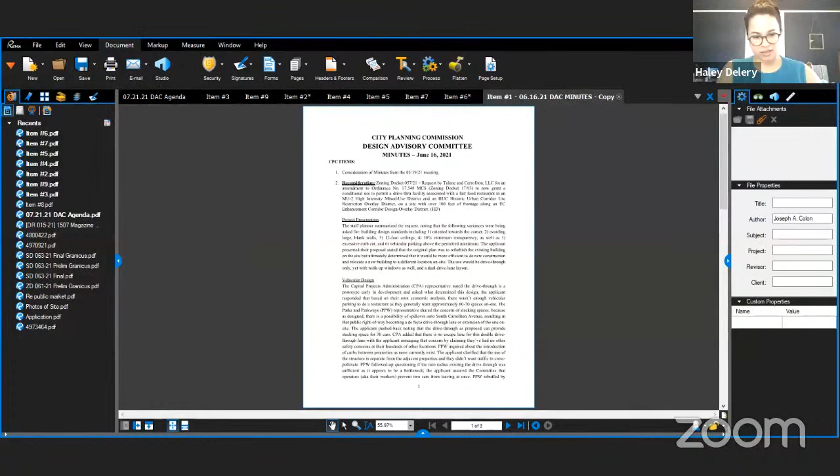We will begin with the consideration of dockets. Item number 2 is the reconsideration of design review docket 4321 for a property at 3200 St. Bernard Avenue. We have Seneca Toussaint signed up to speak on behalf of this application, and Joseph is the CPC staff member assigned to this case. As a reminder, following the staff presentation, the applicant will have 10 minutes to present.

Joseph? Hey, yeah, sorry about that. I'm seeing the applicant just emailed me and they're saying that they were not ready to appear today and they will also be on the August agenda, so we can go ahead and withdraw this one and review it next time as well. Okay, thank you, Joseph. So item number 2 is withdrawn.

The third item on today's agenda is the consideration of zoning docket 5221 for a property at 1152 Magazine Street. You may remember that this property previously received conditional use approval for multiple components, including an indoor live entertainment venue. This conditional use request is now before us because they are proposing to add a standalone wine shop, and the scope of DAC's review today would be to look at the proposed facade modifications. We have Megan Bell signed up to speak on behalf of this application. Megan, you now have 10 minutes to present.

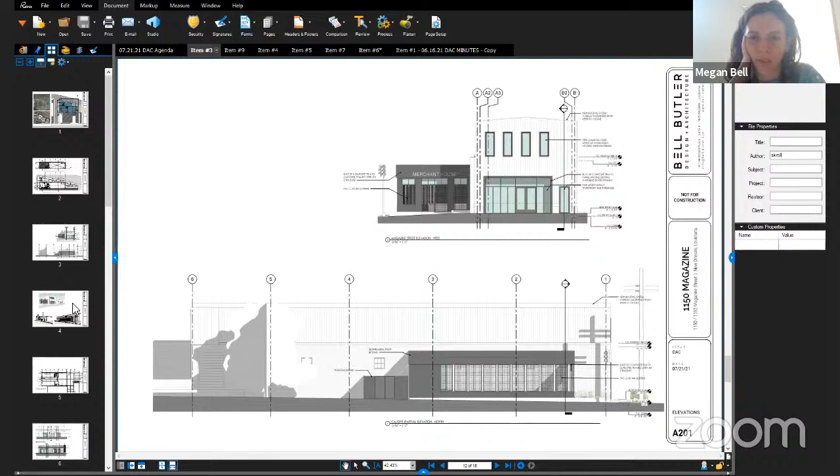Yeah, I think this is an outdated version. We actually changed the upper level windows to be aluminum. There we go, that's the one. Aluminum clad windows that are mulled together to give the opening a more warehouse-like feel. So that's the main change in these drawings.

So the existing overhead door at the ground level, we're proposing infilling with storefront, and then removing the 2 small upper level windows to be replaced with these mulled together aluminum clad windows.

With the addition, what we intend to do is an open air addition that still provides for security. So if Merchant House were to store patio furniture or plants out within this structure, they would still have a way to lock it down at night and provide security.

So the development of that was just to do these 4x4 fence panels, which are wire fence panels that are PVC coated. That's the kind of grid pattern you see in the elevation. We tried to detail it in a more traditional way where the front has a parapet condition that could be trimmed out with a composite trim element, and then you'd have the infill of these PVC clad wire mesh fence panels that would create a double gate at the front that could be opened when the business is open, and then another gate on the right side that provides access to the ADA ramp.

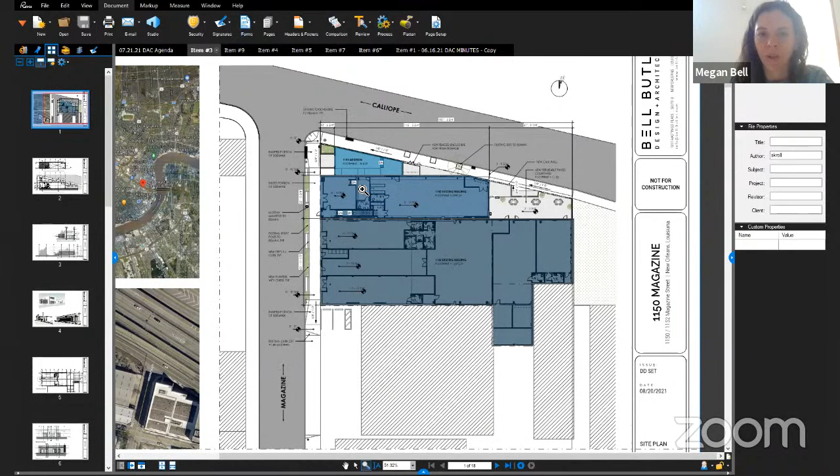I think we just wanted to create an offset and a kind of outdoor entry area. Where that facade actually falls out, I think is pretty flexible. The ramp itself does present a challenge, and I'm actually not sure how. I think I'll have to answer some questions with the state fire marshal, for instance.

Because what we're having to do is create, so there's a primary set of double door gates that are centered in that elevation. And then on the right side where the ramp is located, we would have another gate that would technically just stay open during operating hours. It's not really meant to be an operating gate for any of the patrons of the space. But so what's happening currently is that the line of that facade is falling out after that first 12 feet of ramp, which brings you up approximately 1 foot.

The grade resolutions here are a little bit complicated because what's happening with the sidewalk is that we're utilizing the sidewalk to provide ADA access to both buildings. We've done a BBSA appeal already for the base flood elevation of 1152, and they're allowing us to be 11 inches above the top of curb.

And so what will have to happen with the sidewalk is that beginning on this neighboring property, it will start sloping up such that there's a 0 grade change at these doors to 1152. We'll maintain that grade across the front of 1150 all the way to this ramp entry. And then beginning at that point, we have to work our way back down to the corner condition of the sidewalk. So it's a little tricky finding the right resolution to those grade changes at all of the various entrances, and I do think having some setback cleans that up a bit.

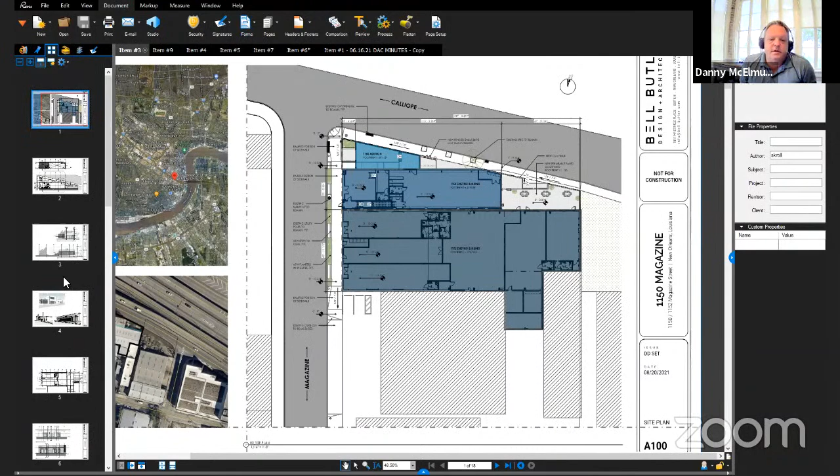It's a good point, Eleanor. I kind of want to hear about the other building too, but since we're talking about these ramps, I have a real huge concern about them, and I know we've talked about it in other buildings. Now the city's on the hook for steps and ramps and pedestrian safety in this location. This is a perfect spot right there, that lower left corner. You're creating a ramp situation in front of somebody else's property, and it's not your property. So that concerns me greatly, that there's an imposition on an adjacent property owner to accommodate your ramp, and you haven't contained your ADA access to your property.

That's a big concern for us, or at least for me, because you haven't provided the street trees that are required. You're creating this situation that we're seeing repeated. It's not just you, none of this is personal, Megan, I know you know that. But we're seeing the same situation recreated elsewhere, especially on this location where this is a one-way street. Car doors are going to have to open out into this little planting area or onto the steps. It's very concerning to me how this is designed to just put the ADA access in the public right of way instead of in your building where it belongs.

Based on some recent experience, we have a project on Britannia Street that utilizes the sidewalk for ADA access, and actually the grade transitions all the way up to like 30 inches above the top of curb, which I find excessive. I think this is a little bit more manageable, as we're only going up a maximum of 11 inches above the top of curb elevations reflected on the elevation certificates. But on that Britannia project, we had a similar condition where the sidewalk modifications intruded onto a neighboring property, and we were told by DPW that we just had to notify that adjacent property owner. So that's been my only experience of this condition.

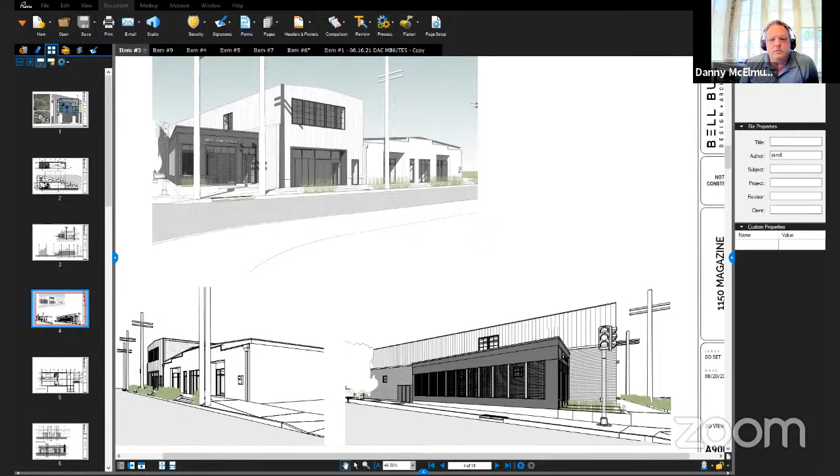Yeah, and I do think we will do tricks like that. There are some code criteria, like you're supposed to have a level landing on the inside and outside of your door, so they don't love if you just ramp right up to the door entry. But I do think when we get into more detail here, we could resolve for at least some of the grade change in those vestibules, and then potentially even start sloping back down in between the entry to 1152 and 1150, just to try to get ourselves lower before we start working our way back to the curb.

Hey, morning, Megan. So I wanted to ask you some questions before I even attempted to comment and make some prescriptions in line with what my other committee members are saying. I don't know if you could see my annotations, but this is kind of the dividing line, right? Like this is one project and then this is the other. Correct. Okay.

So I'm very fascinated by Eleanor's point, because I actually didn't mind the kind of open space relief at this corner, but then just reviewing this condition of these two buildings as one, right? And they can be accessed interiorly as well, correct?

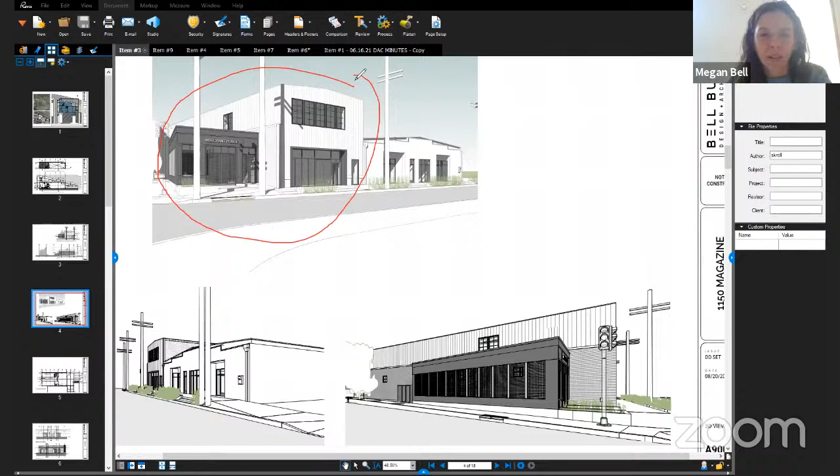So what's happening in the floor plan, you can't access what we're calling tenant one, which is that ground floor storefront in the old overhead door. They actually do want to have a convenience store between the two tenants internally, but the whole intention of the addition, aside from giving them some covered outdoor space for their plant and patio furniture programming, is— I think the owner's concern was that they're giving up their prime storefront and street presence by creating that tenant in the front. It makes a lot of sense financially to do that, to get more leasable square footage into the building. So the addition was an opportunity to still give Merchant House a strong presence on the street and have the feel of a historic storefront, even though in reality, the building is kind of an open air covered outdoor space.

Gotcha. And so what's just kind of the scope of work for this existing structure? I know we have photos of it later, which I can go to now, right?

So these are the existing conditions.

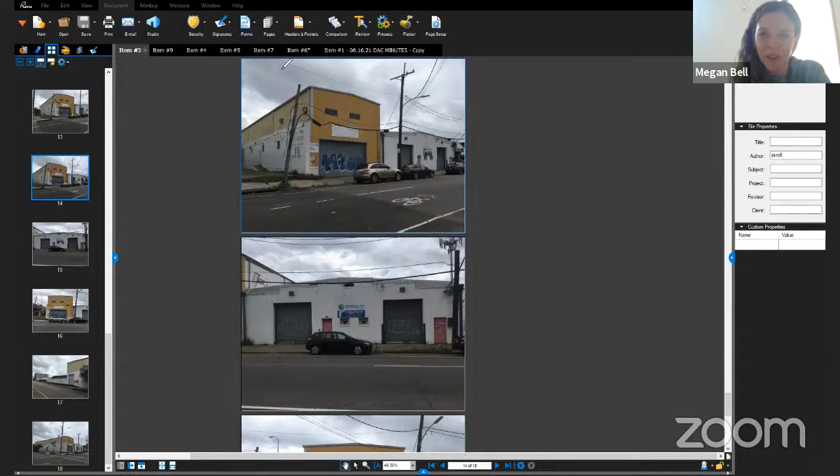So how much work do you plan to do on the exterior is what I'm trying to ask. That's been a little bit of a moving target, and we're bounded by budget. So what we're attempting to do is things that don't have a lot of visual impact, which is condition the building, put a new roof on it, insulate it, all the things that make it a viable commercial property.

As far as the facade is concerned, we're trying to keep the modifications minimal but still have a strong impact. On the Calliope side we do propose one set of aluminum clad windows with a divided light configuration, but otherwise on the Calliope side and the front of the building we would maintain the existing metal panel cladding.

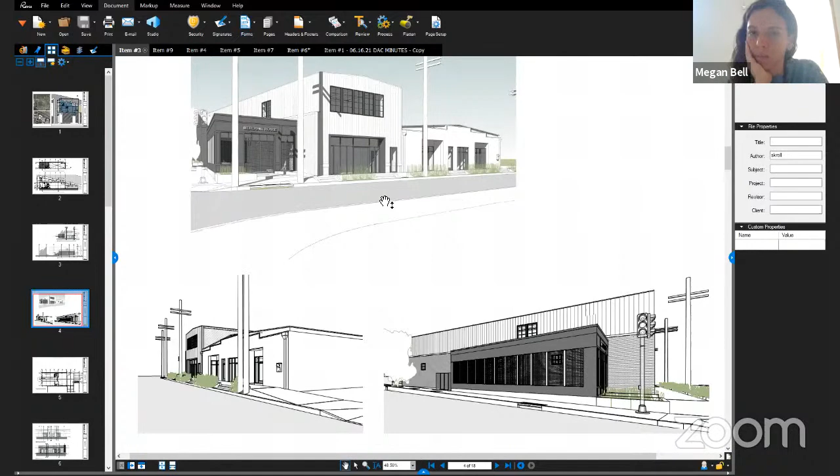My only concern from an overall design perspective, I'll temper it because it sounds like they're somewhat different tenants, but in line with Eleanor's comments, it's pushed far to the back, it feels like, especially in this rendering. Sorry, I'm looking for the tool, I can't find it right now. This condition just feels so tacked on, like it could be easily removed from both the property and its adjoining building.

I wonder, you're introducing a lot of architectural elements with the Merchant House. One, can we start to see those elements reflected on the existing metal panel warehouse? Two, if it's all exterior, then why does it look so enclosed?

Maybe you don't necessarily have to move up the front facade, but you could include some column and trellising elements to create a somewhat covered entryway into that merchant house building that ties into the front facade. So that would mean carrying over some horizontal elements or something.

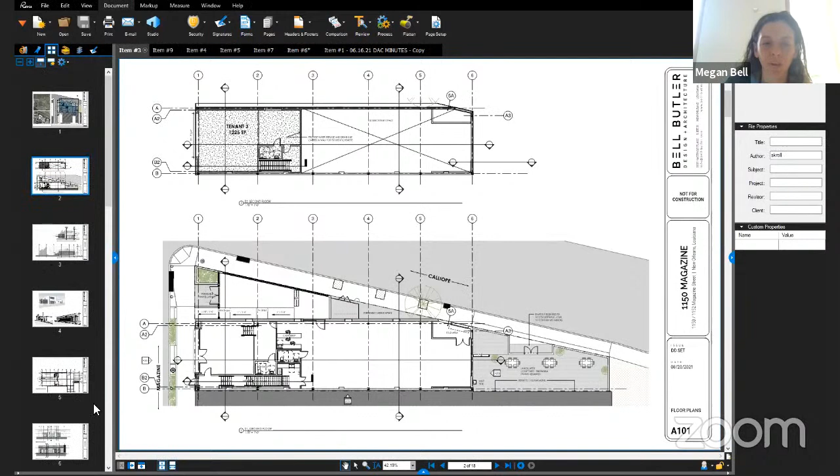Can I just point out, with regard to the ramp, because we are up that plus 11 at the base of the ramp you're seeing, we only then have to account for 36 inches of change. We're dealing with a pretty excessive grade change for that existing property, about 48 inches above the current top of curb. So while we are accommodating for some of the grade change, the sidewalk is helping us get there without having an excessively long ramp.

Okay, so Eleanor, go ahead. Sorry, Megan. All right, I just wanted to add that these are two separate approval processes. The one we're about to look at now, 1152 Magazine Street, is subject to a conditional use approval, so it's on a different timeline. We had a lot of discussion about the addition at 1150 — it would probably be okay to defer that to allow design changes, but for 1152, we're looking at the conditional use for the standalone wine shop. So hopefully we can look at that as two separate approvals.

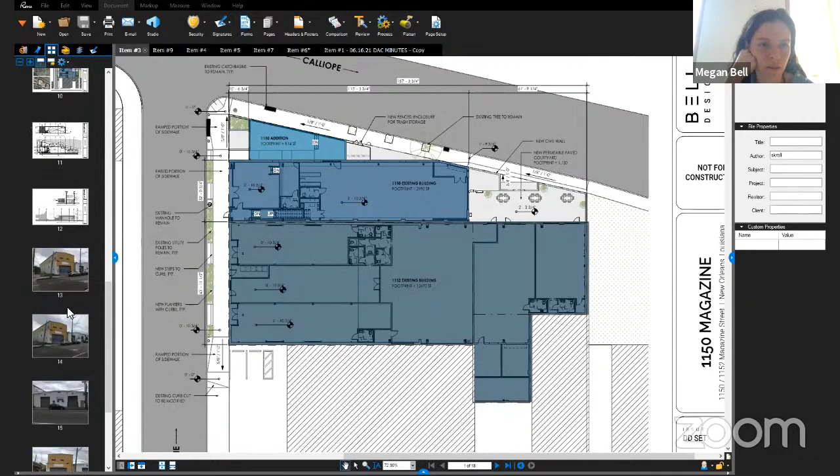So the facade modifications, if we want to go to a view of the elevation. Similarly to 1150, what we're proposing is that the two existing overhead doors get removed and we establish a vestibule entry with a new storefront double door entry in each opening. At the center of the building, we would remove the door currently shown as glass. Its elevation is a bit lower, so we'd bring the door heights up to get a consistent line across the elevation. Where there are two small punched openings now, we're proposing a new storefront opening.

This project is going for tax credits, so we've had preliminary discussions with Allison Saunders about this approach and already tweaked things based on their feedback. We were originally proposing eliminating the door altogether, and we're now going to maintain it. They want us to keep this small door at the end of the building — it doesn't need to be utilized, but as a remnant of that historic warehouse utilitarian use of the facility. This is somewhat subject to change based on when we receive formal Part 2 comments.

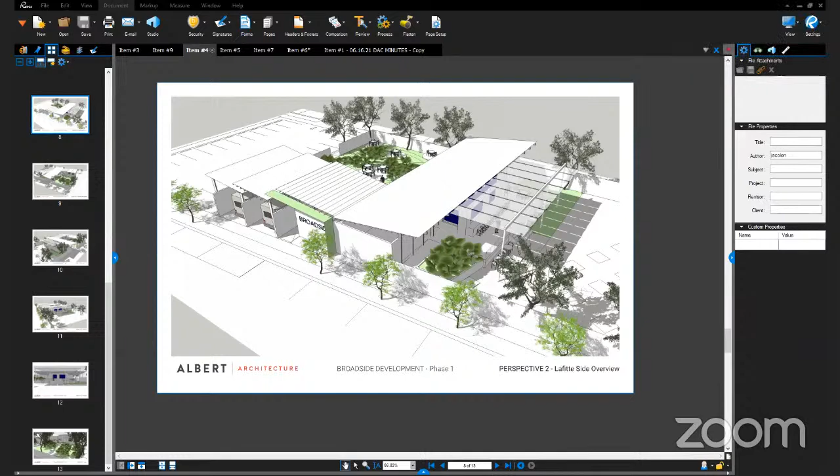So the seating area, you asked what's the ground - the ground is just limestone, a 610 limestone. And that area is approximately probably 3,000 square feet or so. I'm not 100% sure on that number. I can scale that out to find out the square footage. I just couldn't figure out the surface. Yeah, so that was all concrete.

That was in pretty rough shape, so we took all that out. This used to be a junkyard.

About where your entrance is, right behind the parking lot, that line approximately is where from there forward to Broad, we've been using it for the Broad Theater parking. I own the Broad Theater, and I also own this. Greenway Ventures was just something I purchased, but this is a Broad Theater sort of side project.

It managed to keep all of our employees busy during the pandemic, which was great. The response has been very positive. People want this to continue, we want this to continue, so that's why we're proposing these zoning changes, et cetera.

I'll probably let Jonathan take it from here unless there's a very specific business related question. Jonathan, you there? Yeah, thanks, Brian.

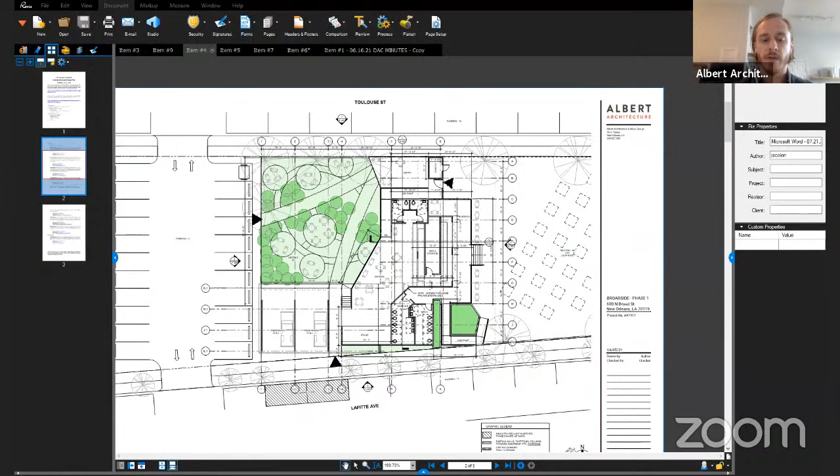Just to continue on the surface item that Robin posed a question to, the intent is to have essentially all pervious surfaces except for the roofs. This does put us above the 5,000 square foot threshold, so we will be providing stormwater management on site. I think we have ample space to do that, so it's not a concern, but our roof area has exceeded that number through the development of the project.

Robin kind of summarizes it pretty well. This is an extension to an already existing outdoor facility. What it's proposing to do is provide an open to the public side, which includes this seating garden and food truck accessibility, as well as a bar.

There's a defining line that separates one side, the public side, from the outdoor entertainment venue side. So there is a point where you would need to purchase a ticket to enter the larger stage area. You would then have access to that same bar from the other side of it, and restrooms are provided to each side as well.

This includes parking on the broad side of the development, and that parking also would be intended to be pervious. The intent from Brian's perspective, as I understand it, is to develop this whole lot eventually. However, this is phase one, which is essentially developing the center of the property.

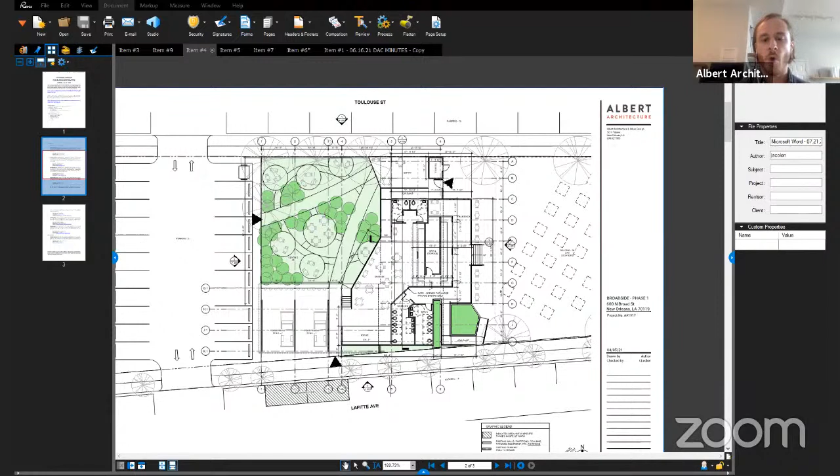The structure itself is fairly open air. There's a series of sawtooth roofs. The primary roof is oriented to help catch sound and direct it into the seating area for the outdoor stage, keeping it more or less contained there. The smaller roofs are responding to that from a design standpoint.

The idea is to allow air to flow through, keep cross breezes going, to keep the conditions comfortable.

Security will be provided by the perimeter fencing and gate system, so at night it will be locked down from the exterior. The structure is primarily wood with a steel post and beam primary structure and corrugated metal roofing on top.

The area is fairly industrial surrounding it, so we feel like this does fit in well. I think the broadside development, which would be an up and coming phase, will have a more finished and commercial look to it, but that's not really what we're reviewing here. I think that's a basic summary. Can open it up to discussion.

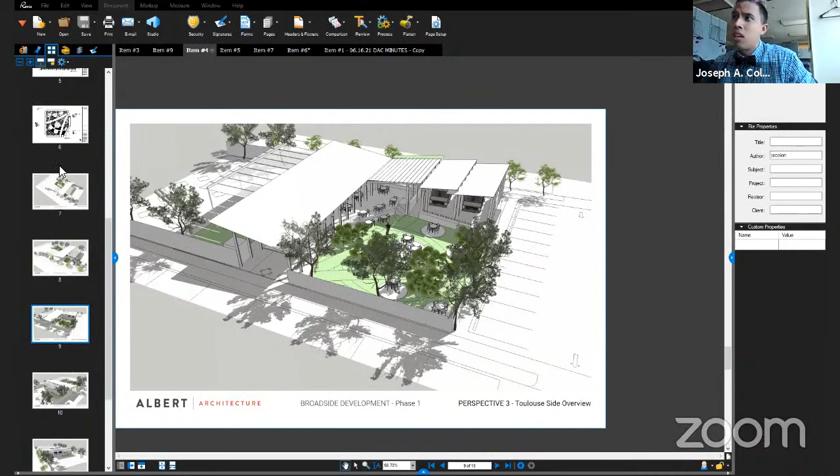Before I provide any comments, I'm just trying to understand what exists versus what's being proposed, because the documents say it's phase one, but I believe you all did say that there is something existing there now. So can you outline for me and the committee in general what on this site plan exists and what is being proposed?

Hey Joseph, excuse me for one second. Would an aerial photograph, a current aerial photograph, help? It's not in the submitted set, so we could just let the applicant outline what's on the plan. Yeah, I'll take it, Jonathan. So if you can enlarge it, maybe. So basically, where you see this, just move your cursor to the right, that's the existing stage.

All this sort of limestone seating area. Some of those trees actually exist now, and then we have this new facility.

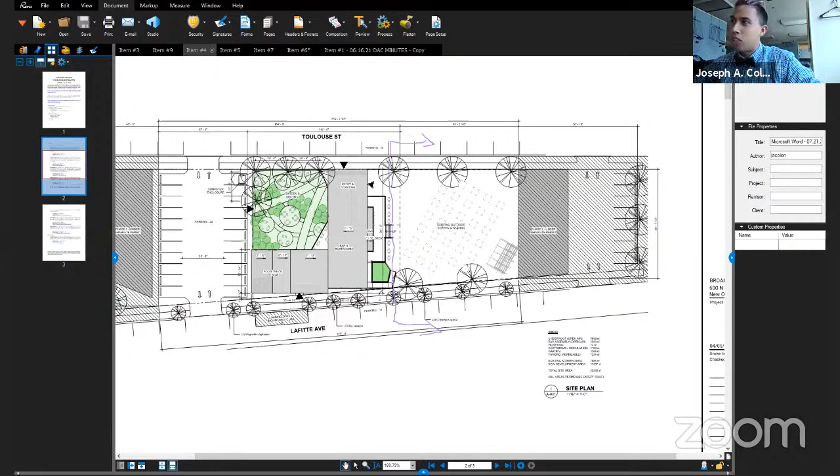Correct. So I'll preface my comments by saying we understand that systemic, city-initiated things require infrastructure to better enable property owners to develop their site in accordance with the goals and intents of various districts and overlay districts. That said, considering this site's in a Greenway Corridor Design Overlay District, and is right by, separated by, I believe a DPW city-owned site, and is in such a central, bikeable part of the city, I'm kind of confused and trying not to be offended at the site's complete disregard for pedestrian and mostly bicycle access. You have an off-street parking lot that is basically the first approach.

That anyone would make from the Broad Street side, which is how most people coming from the Greenway would access it. Then you have a lot of on-street parking, which of course you're allowed, but it's further defensive, in my opinion, of that bicycle access. I haven't spent much time with these plans, but I haven't seen any bicycle racks. So I don't think the site and proposal as designed is meeting the intents of the design overlay district that you're in.

That said, I will say that the green space, the built structure, and the concert area is all very well designed, and I feel it's very hospitable. But everything around that is not, and it's too oriented for vehicular habitation. So that's what I'll provide.

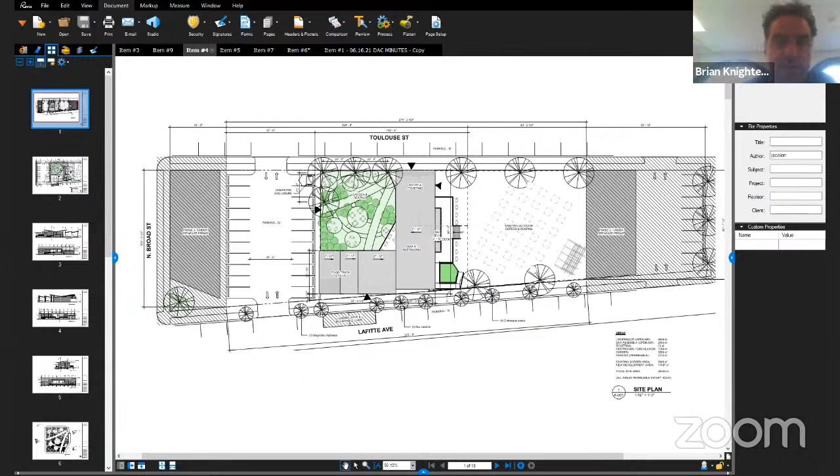I don't know if any other committee members have any other comments, but can I respond to that? Sure. Right where you have this entrance on the Lafitte Street side, there is bike parking planned for that location, and currently we have bike parking in the front of the current setup. There's bike parking in the front, but right where that entrance is, there is bike parking we're going to put in that location. Can you draw that with the annotation, please?

I'm sorry, can you say that again? Can you draw using annotation and show us where it's going to be? Because I don't see it. I don't think it's currently on there, but this is something we are adding on. Jonathan, can you do it right at this sort of Lafitte entrance? This area is covered, so that is the ideal location for bike parking. That is an entrance from the Lafitte Street side, so we would put bike parking right there.

As my fellow committee member said, we review what's in front of us, and it's not shown, so intentions don't really go much for us. I think having food truck stall space is great, but again, where is it located? It's located on the approach from Broad, which I'm glad we went to in this plan. It's a further vehicular-oriented place that, frankly, as a biker, I would have a hard time accessing. I think this needs a major redesign, but I defer to my other committee members because I'm just one voice on this committee.

Well, I think the basic concept is pretty solid, and I'm looking at the aerial photo that shows what's there now. There are several pieces of property, so I'm not sure how that's handled, but overall I think the concept is pretty solid. It's the details that are tripping you up, where the parking lot doesn't meet the zoning code, and we're not even seeing the sidewalk connections very well, at least not in this set. Maybe that shows up a little bit better.

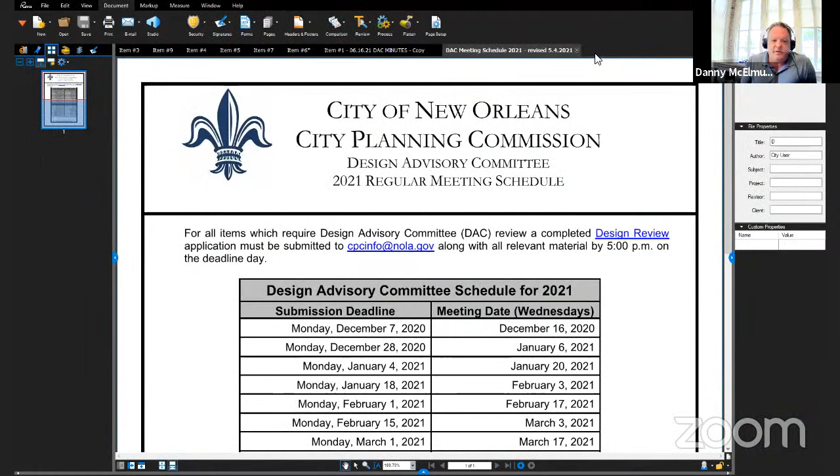One of the things too, we don't have a landscape plan, which is problematic at best. I think a landscape architect would have solved some of these problems for you. You've got to have street trees for Toulouse, as well as the ones on Lafitte. You're going to need them on Broad and the rest of Lafitte when you do the other two phases. I'm not sure what they'll be, but you'll still need to have the street trees installed there.

I just wanted to point out that we don't have a landscape plan to react to. The site plan does call out— I'm going to stop you right there. You know as well as I do that in Louisiana, that is not the law. The law is that you provide us with a landscape plan, not a site plan. A site plan cannot call out plants. I know I'm being picky about it, but you cannot do that. It's against the law, so just comply, please.

Sure, I would like to point out that within the Greenway corridor, the pedestrian and bicycle entry point should be oriented towards the Greenway. I see that the new outdoor green space is fronting more on Toulouse Street, and you have more of the food truck and vehicle stuff towards Lafitte Avenue. I'm just kind of wondering how the food trucks would access that location.

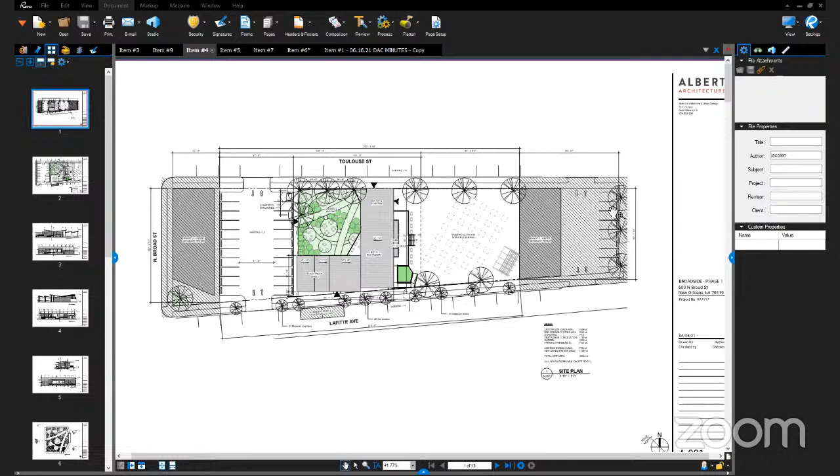Yeah, and there's a lot of that on Lafitte Street. I will of course never instruct the applicant to do something that's not required by law. I will say that personally, I do question the need for this much off-street parking, and at the end of the day, it really shouldn't be one of the predominant visual or site elements in this location, in this design overlay district.

Do you think any of this could be resolved with like a corral on Toulouse or Lafitte?

Okay, thank you for letting me know that, I appreciate it. Right. Hi, I can hear some background noise, if we can all mute our microphones.

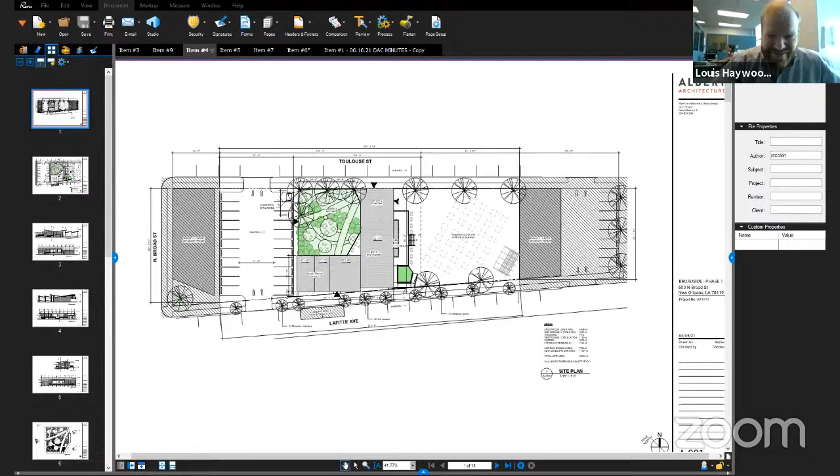Okay, I got it. Louis, what do you mean by a corral? Like a lot of bike parking in the parking lane, or even building a curb extension and putting it on top of that. I don't know if that satisfies anything in planning terms, but it's a way to replace parking spots with bike parking, though bikes would still be going through the parking lot. Maybe putting a bike corral using 2 or 3 spaces right at an entrance, close to the street entrance, could be an improvement.

Yeah, certainly, we would definitely be open to that for sure. Just letting you know that could be an option.

Louis, does having the access... I really like the idea of having these pull-in stalls for the food trucks, I think that's really great. I want you to know that. My question though is, does that count as a driveway, or how does that work?

Probably counts as like an off-street loading zone. There's currently a mountable curb at that street, so the idea was just to leave it as existing, reserve those spots, and the trucks could pull over the sidewalk into there.

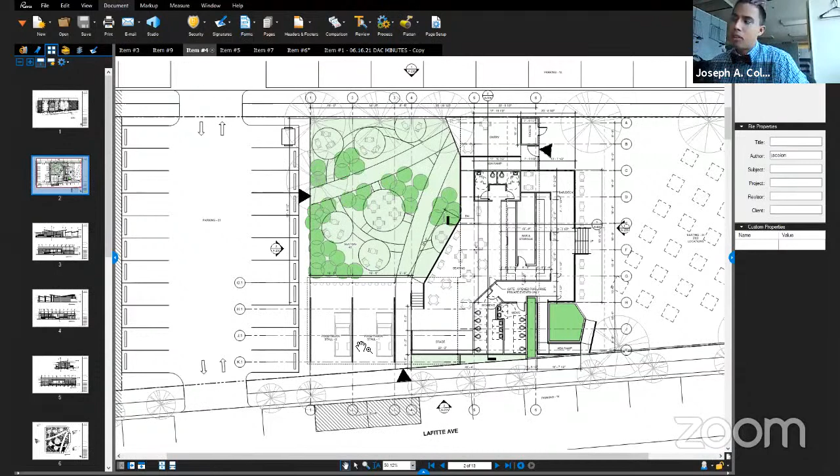This is for Robin or Louis. I'm a fan of this food truck pull-off, but I don't know if this is the correct orientation, because would this classify as an excessive curb cut width, or amount thereof? It also appears they're having a curb cut and a loading zone, and that feels like a kind of traffic conflict.

Yeah, I mean, it's probably not really a loading zone, probably. We have some other places with signed loading zones at off-street loading areas, so it certainly wouldn't be the first thing like that, and maybe we do that here too. But I wouldn't get hung up on it, it could be done either way. If it's an obvious driveway, we probably wouldn't sign it, but we do it in some larger driveways in the back of office buildings and stuff. We've done it before.

And there probably would need to be some kind of permeable material put in that parkway as they're going across it, just so the wheels don't get stuck in the grass.

Yeah, in terms of it being excessive width, you may have a point. That's also controlled by zoning, at least halfway, since it appears in the zoning code. So we usually want to see a variance too for that, if y'all think it's a driveway.

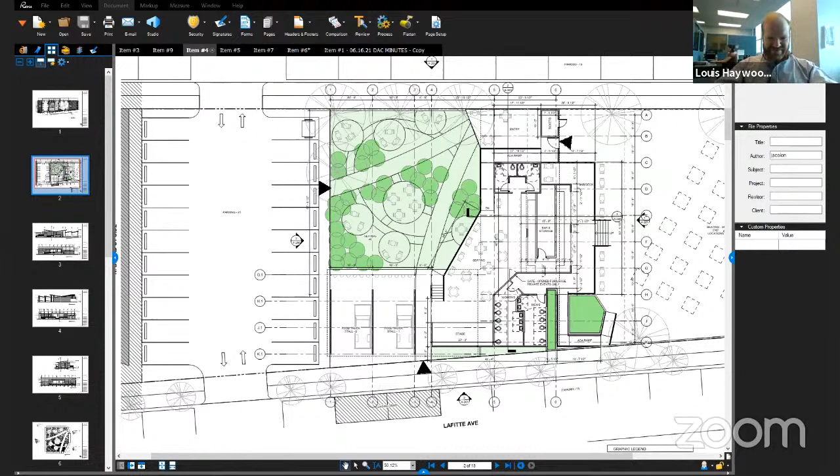May I say something about the orientation of the food trucks and why they're there? Just to the right of this entrance is the main signage for the business. That looks like the visual entrance from the Greenway. I'm not sure what page it's on, but that's why they're there. If we were to move it to the other side, it would lose that wall where we'd have that entrance.

If you go back, yeah, right, that's the one that says broadside. Correct. And we had discussed, post you guys receiving these plans, putting bike parking right along this wall. This is set back off the sidewalk, I don't know how many feet, but it's an ideal location for additional bike parking. We could easily secure it with cameras.

It is an entrance, so the orientation of the business faces the Greenway. Although you're right next to the gas station, so you can't see a whole lot from the Greenway, and the growth of the Greenway too really obscures the view of this facility, but mainly the gas station.

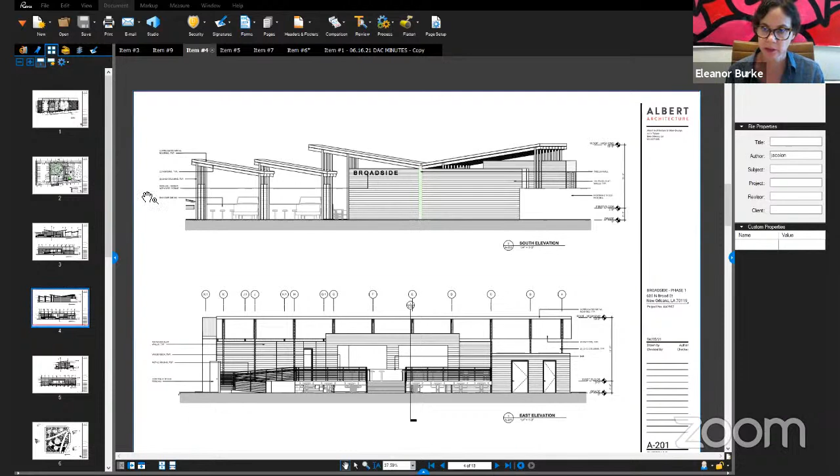What phase 2 was going to include. Phase 2, which would be the front here of the property, that is going to be probably a 2-story, retail on the bottom. I don't know, maybe apartments up top, maybe a 3-story structure. Something that has more of a daytime use, like a doctor's office. I do have a dentist who's interested in the space. It's only about 5 bays, once you take this soft corner, really only about 4 to 5 bays. So something like that, just retail on the bottom.

Okay, otherwise I don't have any concerns with the proposed design. I think it looks really interesting. Thank you.

I would like to point out that a loading space must be at least 35 feet in length, and these seem a little bit shy of that. Also, they're not allowed to be located in the front yard, so these are slightly projecting in front of the building line, which would be technically within the front yard. So I think we need to look at whether these are considered loading spaces where the food trucks would be, because they don't meet the size requirement. Although your site constraints are determined by you, you can pull that front line up into the outdoor area.

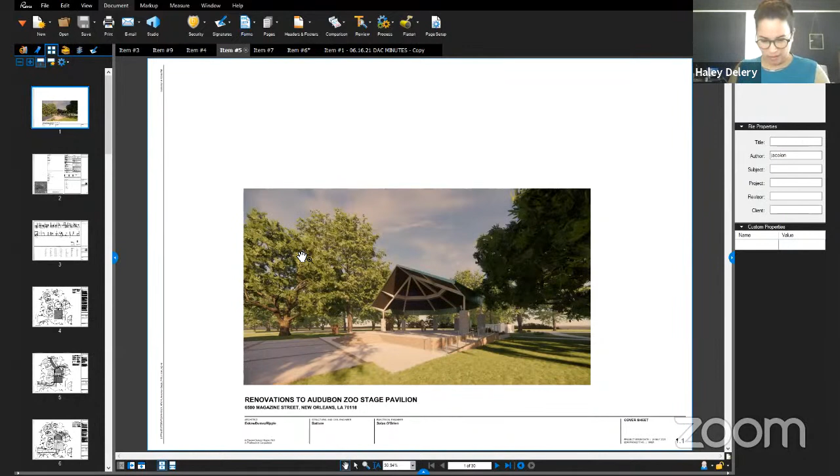Okay. Is there any other conversation from any other committee members? Thank you. If not, we will be moving on to item number 5, design review docket 7521 for a project at the Audubon Zoo. This is a renovation of an outdoor amphitheater. It requires DAC review because it is a public project. We have Mike Johnson signed up to speak on behalf of this application. Mike, you now have 10 minutes to present.

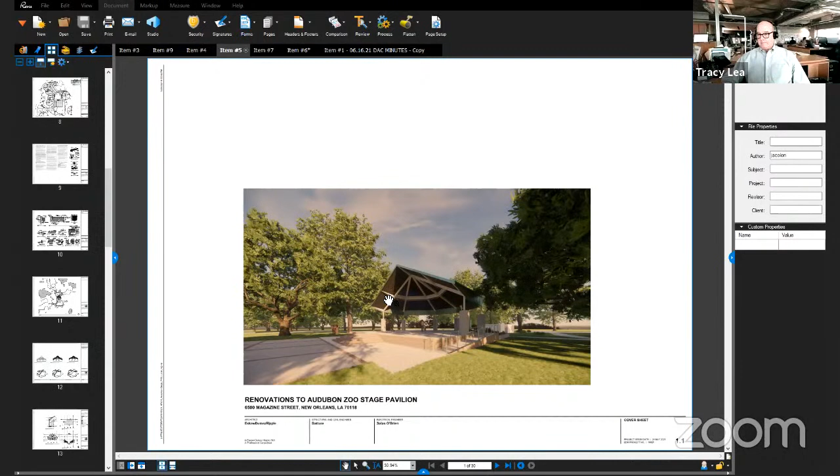Hi, good morning everyone. I'm pinch hitting for Mike today, he's on personal time off. Tracy Lea with Eskew Dumez Ripple Architects, representing the Audubon Commission, our client. This is the stage pavilion that's within the confines of the zoo, within the zoo grounds. And if you've been to the zoo in the last 35 years, you've seen it. In your packet, if you turn to sheet 1.51, you'll see some existing photos of it. Sorry, what page number is that? 1.51, and I think you'll recognize it right away.

The Audubon folks have secured some funding in return for naming rights, and they're matching it with some of their own funding to upgrade and update this thing.

And there's some functional things that we're doing with it. But they also asked us to take a look at freshening it up and updating the design to bring it into the 21st century. It was built in the mid-80s, and it has this kind of postmodern pediment that's the defining feature.

It has a copper roof, which is in good condition, and the stage itself is cast in place concrete, which is in okay condition. We're proposing to resurface it. The rest, it's a steel and concrete structure, and all that's in great shape. But the pediment and this apron element are wood, and they're rotted out badly.

So the proposal, the intervention, is to try to lighten it up a little bit. It's architecturally sort of heavy and a little bit oppressive. So the idea is to scrape away some of that wood, which needs to be replaced anyway, and raise the structure a little bit and just lighten up the whole thing.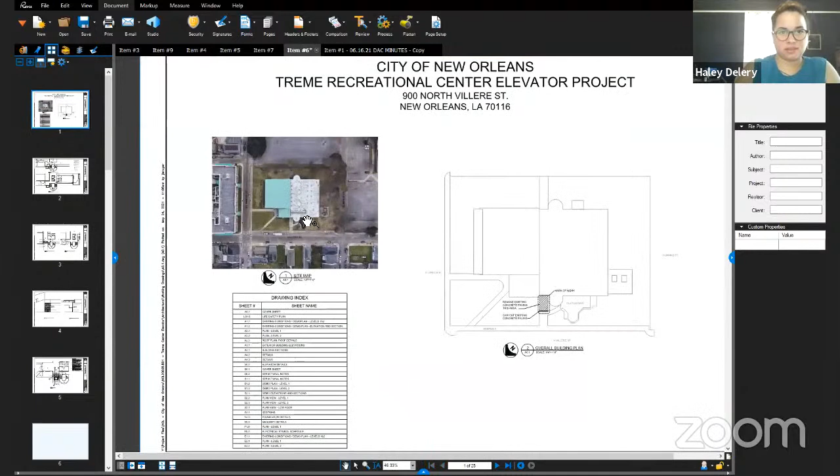This is design review docket 7621 for a project at the Treme Center at 900 North Villere Street. The proposal is to add an elevator to the front of the existing building facade. The reason this requires DAC review is because it's a public project, and we have Greg DeCourcy signed up to speak on behalf of this application.

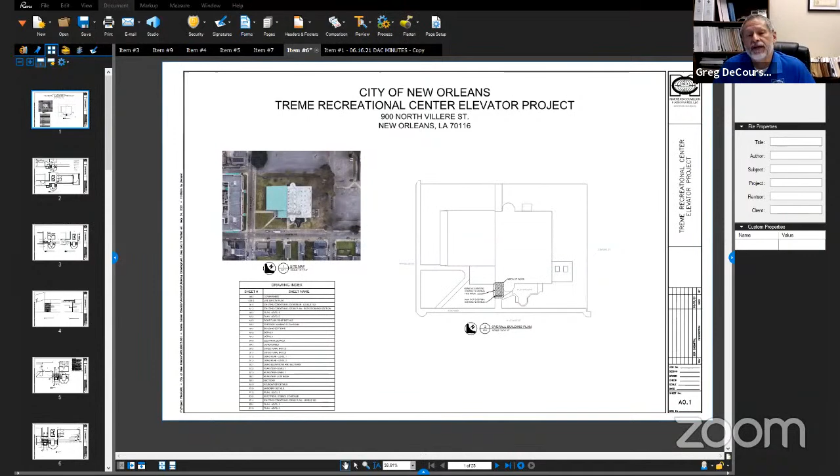Greg, you now have 10 minutes. Sure, thank you. The elevator is being installed by Capital Projects for ADA access to the second floor.

I think I probably should tell you why it's located where it's located. The building footprint is pretty large, but the bulk of that footprint is the gymnasium and the swimming pool, which are 2-story spaces. The second floor is actually more of a mezzanine. It has a dance area, a crafts area, an office, some mechanical space, and a fitness area.

Most of that second floor is along the North Villere side of the building. There is an area that goes toward the back of the building. It's not too wide. We looked at areas both inside and outside as a place to locate the elevator. Inside was pretty problematic just because of the way it's set up.

There was a space on the second floor that looked promising, but the locker rooms for the swimming pool were right underneath it. With situations like that, where we couldn't line up the first and second floor too well to make things work, in addition to the fact that doing construction like that inside the building would have been pretty disruptive to the function of the building.

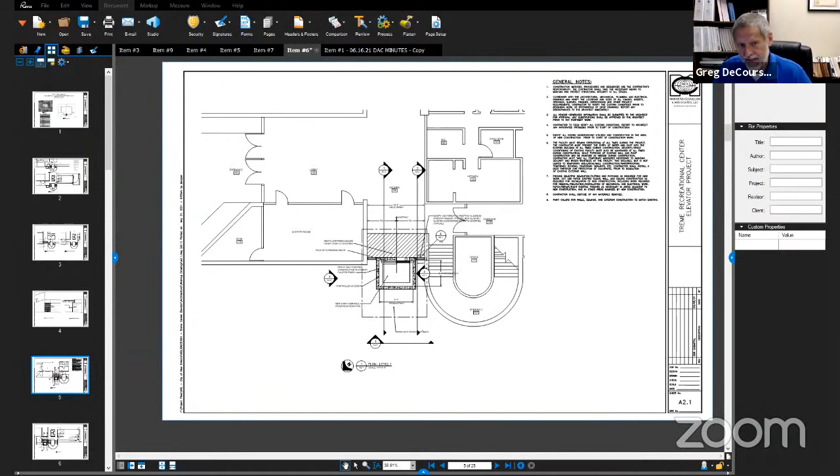But code-wise, I should mention, as far as exit width, this building has plenty of exits, and even removing this exit from service, we still exceed the required exit width by code.

There was one other code issue that came up. The craft area, on the far right hand side of the second floor, used to have a door connecting it to the dance area, which was removed in the last renovation. We're having to put that back to keep exiting within the maximum allowable distance. So coming from that area and down the stair, rather than making a U-turn and going out that door, they'll have to go to the main entrance.

We would have liked to have the elevator off to one side and kept the door there, but there are pile caps on either side of that opening that would interfere with the elevator pit if we had done that. So we're centered in that opening. We're putting windows on either side, but there's not enough room to keep a door there.

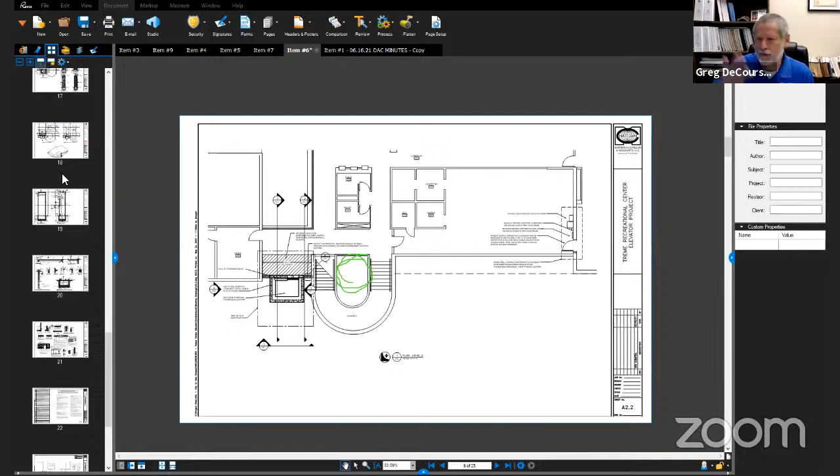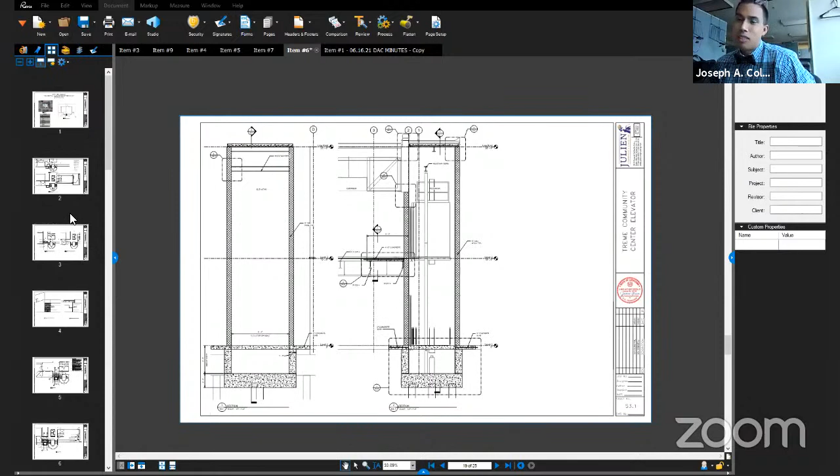Joseph, only sheet S2.2 shows a little bit of an axonometric view. I appreciate the sheet numbers—can someone send me an actual page number? Like, is it page two? It's like page 18. Oh, thank you so much.

You're going to have to do a lot of accommodation on the building facade, since the second floor does overhang and the door is actually recessed, so you're going to have to do some structural accommodation anyway. Yes. So if you're going to do that accommodation and you had to have it on the exterior...

I don't know why it can't be on the right-hand side of the stairwell, in that play area, with a new sidewalk leading up to it if necessary, or however you need to get to the access route. But since it's external, there's no reason it can't be in the playground area, if you're going to have to do physical modifications to the facade anyway, without having to close off that door. I just don't get that.

Yeah, we're just trying to stay out of the meeting room. But isn't there a hallway right there, by the meeting room? Am I not looking at the hallway plan correctly? The hallway is outside of the stair, but once you get past the stair, you're in the meeting room.

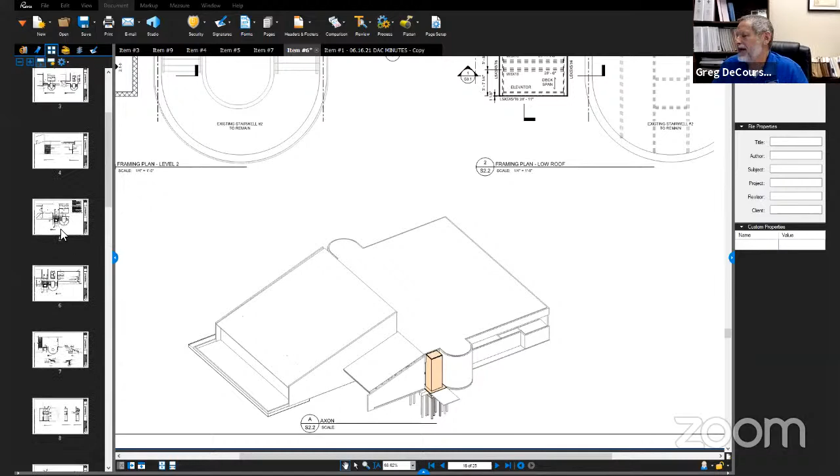Danny, is there a second floor plan we can see in this set? Yeah, if you go to sheet 2, you can see on the second floor there are small rooms as you go into what I think is still the dance studio, but there are smaller spaces in there. That door into the dance area would need to be moved over to accommodate it. And I know in the meeting room, that does create where they're going into the meeting room, but closing off a main entry to me is really problematic.

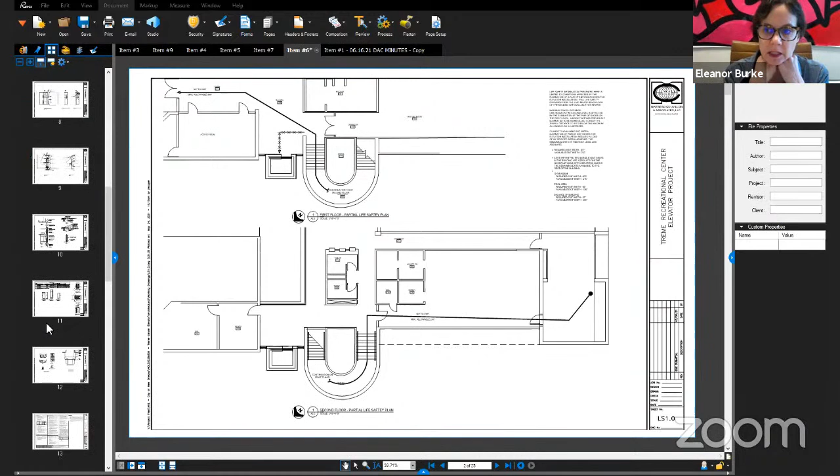Is there an elevation drawing showing how it impacts the front of the building? Just that one little axonometric on sheet 18. Yeah, I feel like we need a drawing showing, what are the materials? I don't know. As I said, I had sent an additional sheet with the photograph and the corresponding elevation, but I guess that didn't make it into the package. Greg, what email address did you send that to? Because I know I requested the information, but I did not see that it had been provided.

Sure, if you give me a second. For this, can we take an exception where it can be forwarded to you?

I don't know which way we're going to vote on it, but in my opinion we're going to have some pretty strong requests for revisions, and I think it's likely, whether it's approved or deferred, that can just be included in the next set. I don't want to speak for anyone else, that's just my opinion.

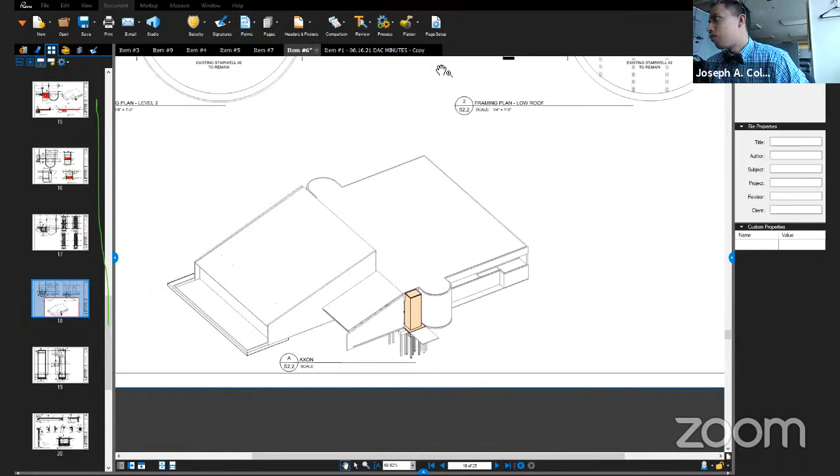Is there any more discussion from the committee members before we move on to the next item? We'll come back after the recess and we can provide any further input.

I do have a question, and I know I'm being a little... I'm trying to clear this. How do I clear this out? Oh, there.

Was there any thought, or did y'all do any studies, Greg, on pulling that elevator a little bit further out and creating more of an entry vestibule with a small bridge going over to the building, so that you don't lose the building itself as being that entry?

We did initially look at that, but basically we were restricted by the budget. As it is, we had to pause this project for a good while so capital projects could go find additional funding to make it work like this.

Well, this building, maybe I'm a little too involved with it, but it has such a very strong architectural form from that time period. Built in the early 70s, '74, '75, '76, it has a very distinct facade. And this is basically just completely ignoring that, saying we're just going to close this off and create this one little block that doesn't necessarily tie the building together. It does not fit the architecture of the building. It's just a big concern for me.

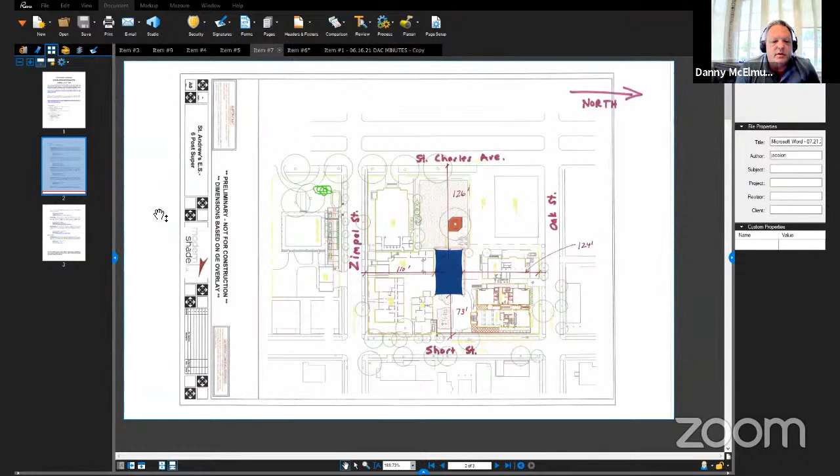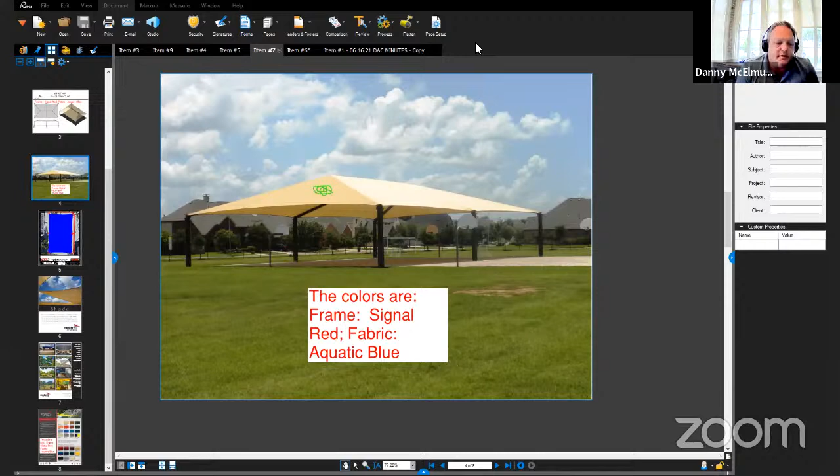Yeah, Catherine, my only question is are you sold on that blue, or would you be willing to go with a lighter color? Because I think you'll get better reflectivity and a cooler site if you go with something more along the cream or white color pattern selections. If you go to number 8 down there, Joseph, there's some lighter colors.

The blue, we found the blue to be two things - blue gets really hot underneath there. We're having problems in Palmer Park because sometimes it gets kind of hot underneath that one. And I think Palmer Park is still blue, if I remember right. And it looks like a FEMA tarp from a distance, so the blue color ends up looking like a big FEMA tarp.

And what color do you recommend, sir? I was just thinking some of the lighter colors, like they have a natural or a desert sand, and even that steel gray or the gun metal - the blue just absorbs, it ends up getting pretty hot underneath there. And the reds also get pretty warm.

Even the red post—whatever color padding you use, I would still offset the maintenance with a lighter color. The lighter color is still going to remain cooler over time, even for the posts, because they're going to be in the sun and get really hot, and you don't want your kids to lean against them and get burnt.

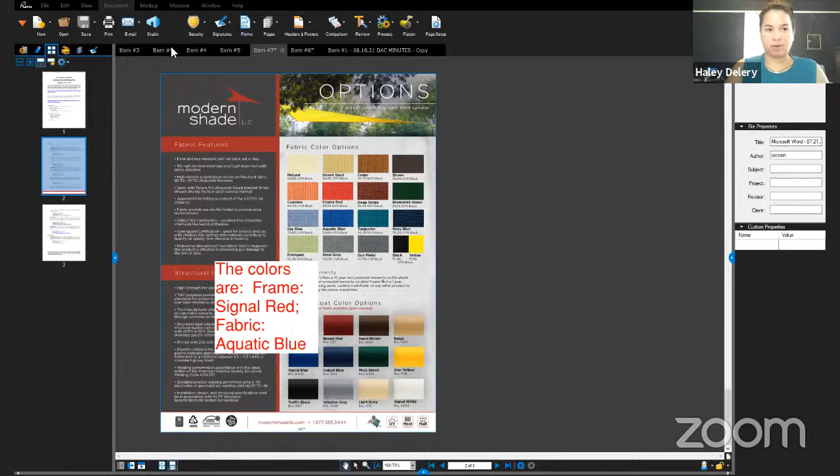If there's no other discussion from the committee members, we will now move on to the last item, because item number 8 has been withdrawn. Item number 9 is a non-CPC item submitted by the Department of Parks and Parkways. This is the A.P. Tureaud Civil Rights Memorial Park, and it includes sign and landscaping improvements.

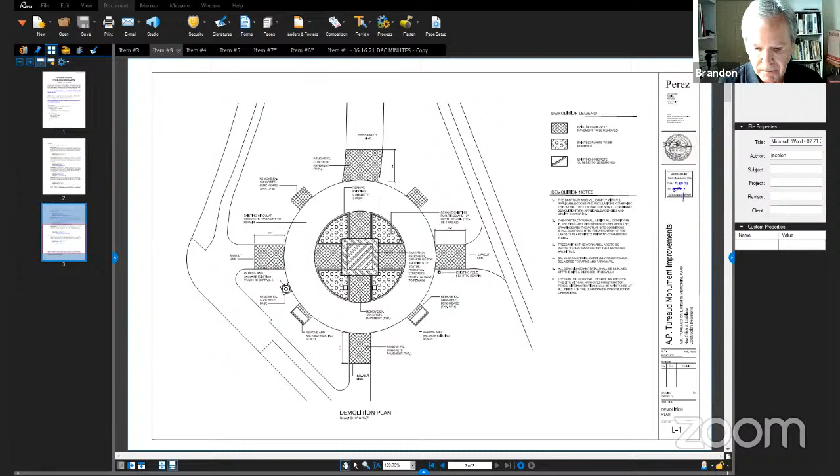Basically what we're doing in this project—I don't know if we have any existing photographs with this presentation. Guess no, it's just the drawings. Okay, there aren't any. Basically, this is an existing memorial of A.P. Tureaud in the 7th Ward, and what we're doing—this project started off as a small project, and it just kind of grew and grew until we're doing basically a complete renovation of this project. And what we're doing is we're moving—

There's some curbing, circular curbing around—this is the existing site, it's being shown right here. We're removing the existing curbing and plants around the statue, and also there are some granite panels that are broken and engraved with text. We're removing all of those, and we're reconstructing, in the same configuration as the existing site, a low wall, the top of which will be at the same level as the top of the platform where the statue sits.

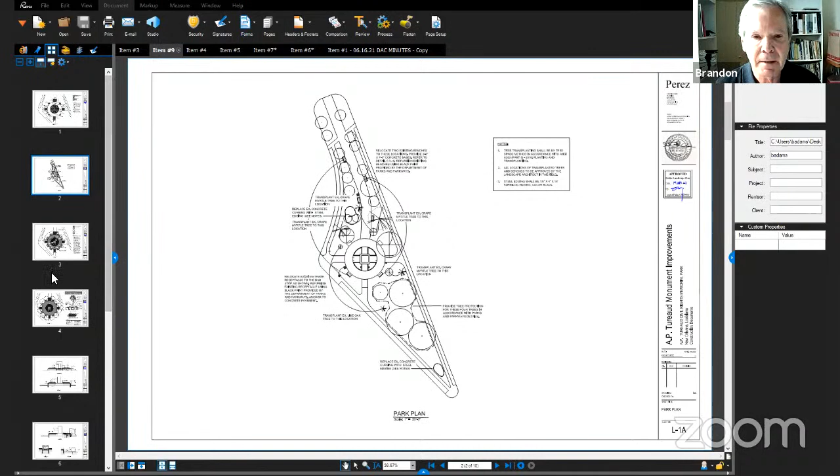So maybe we can go to the proposed site. This is the proposed site. As you can see, there's a wall around—a circular wall, low wall. It goes around, and there will be plantings between the low wall and the statue area. On the low wall, there will be smaller plaques that go around to describe a number of other local civil rights leaders from New Orleans, describing their career and their life. So not only is this memorial a dedication to A.P. Tureaud, civil rights leader, but other individuals as well will be described on the plaques that surround the memorial.

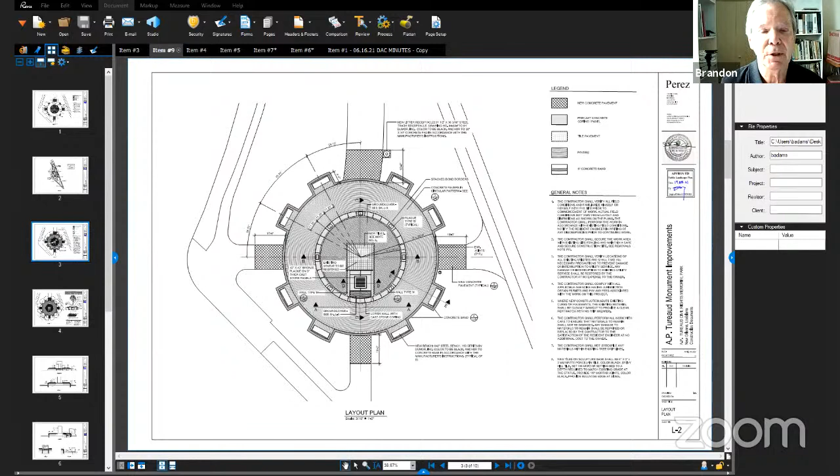I guess some of the other features: the low walls will have precast coping on top of them, and the walls themselves will be concrete with integral colored concrete and a light sandblast finish. And then we'll have new pavers to go around as well.

There's new landscaping. There'll be ground covers, like a low ground cover around the statue area, and in front of the statue will be a flowering seasonal material and a larger plaque that describes A.P. Tureaud. These are bronze plaques.

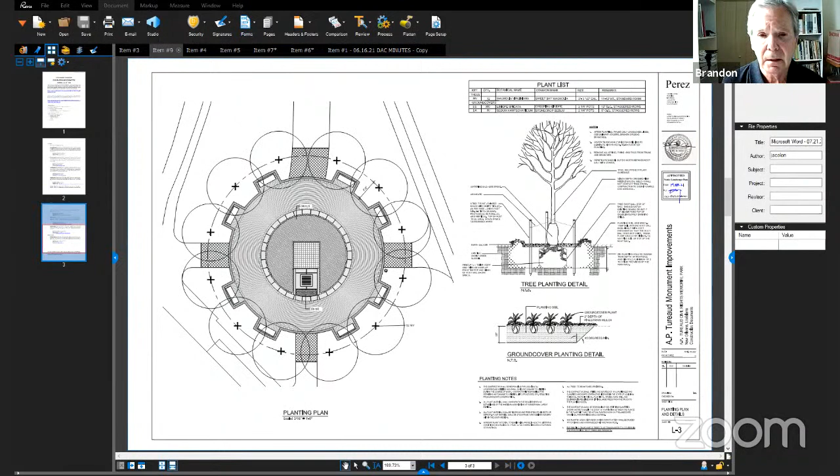In addition to that, we were going to be surrounding the site with sweet bay magnolia trees to kind of enclose it.

We have all new site furniture, and it matches the type of site furniture that Parks and Parkways usually specifies, with new benches and new trash receptacles.

I believe that's probably it. I'm going to try to get my computer speaker back on so I can hear.

Okay, I guess if you can go to the other drawings, the next drawing.

This is a section that shows the rectangular area representing the statue, which is going to be restored. There's a method - I actually talked to the original artist of the statue.

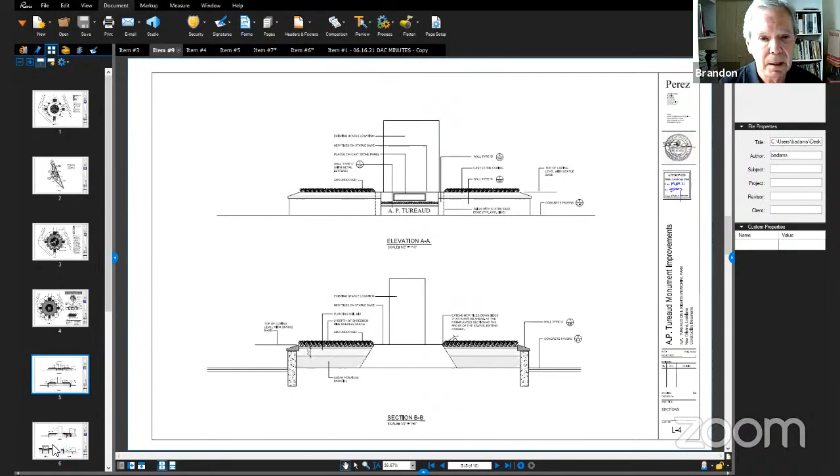You can probably go to the next page. Maybe the next page after that. I'm sorry, there it is.

Okay, so you can see in the lower left-hand corner the existing statue. We're going to restore the statue itself because the bronze material has gotten kind of corroded - not really damaged, but the finish itself needs to be restored.

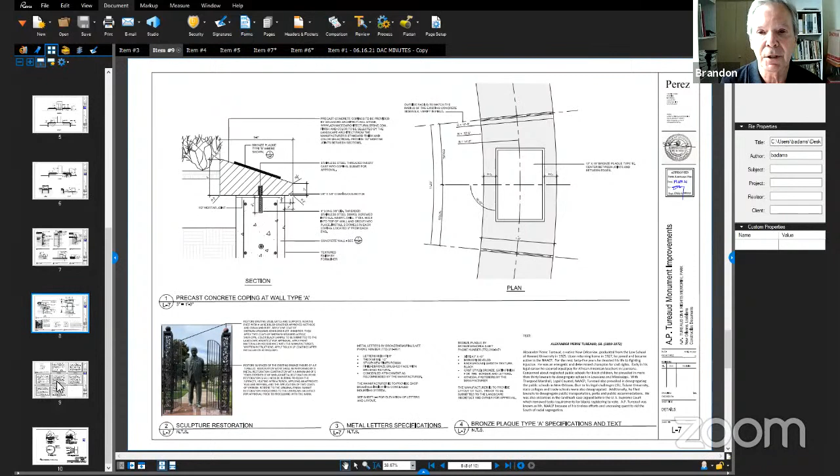There's a method they use where they actually use a torch, wax, and buffing. After it's cleaned that way and waxed, it'll be varnished, with two coats of varnish on it to protect it. So you can go to the next.

These are all the plaques that surround the site to describe the other civil rights leaders that we're dedicating this memorial to. These would be smaller plaques that surround along the low wall that surrounds the statue area.

I think that's about it. I guess any questions? I've worked with Danny from Parks and Parkways on this project, so Danny's very familiar with it.

I just wanted to point out that the existing site furnishings will be reused on site. They're going to be repainted, restored - we're putting them in different locations, further down along the sidewalk.

And we won't be losing any main trees, I don't believe, right? No, we're transplanting. There are some smaller trees that we want to move to make it very simple and formal, surrounded with the bay magnolia trees. So we're taking those trees and relocating them nearby in the park - those trees will be transplanted.

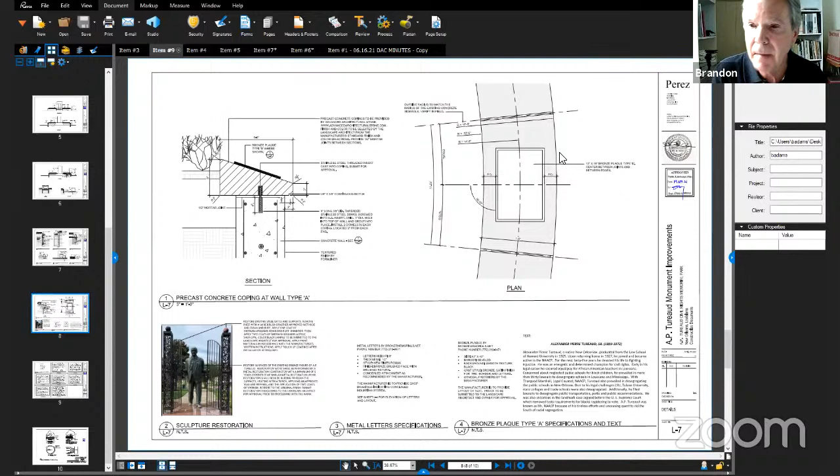If you go back, I'm not sure what sheet it's on - it's on sheet 5 or 6. There's actually a section that shows it. Are you talking about the main plaque, the A.P. Tureaud plaque, or the smaller ones?

The ones that would be the 9 or so that you have surrounding the statue. Oh, the ones that surround the statue? And you're asking what size, and for readability purposes, where - what height are they mounted at?

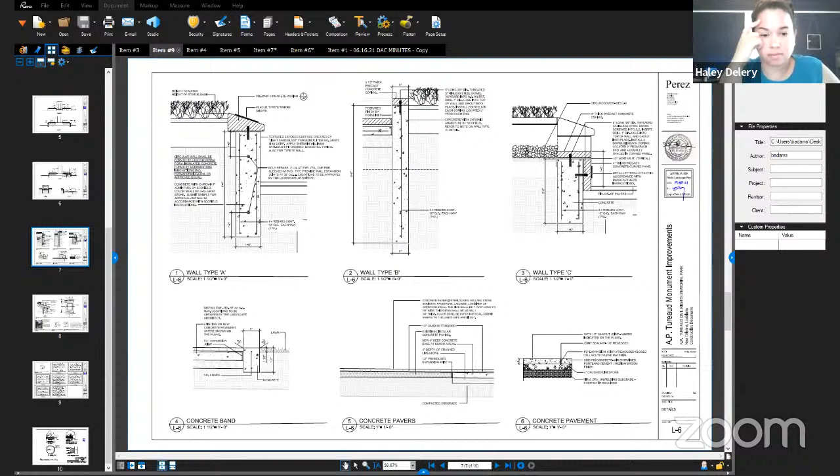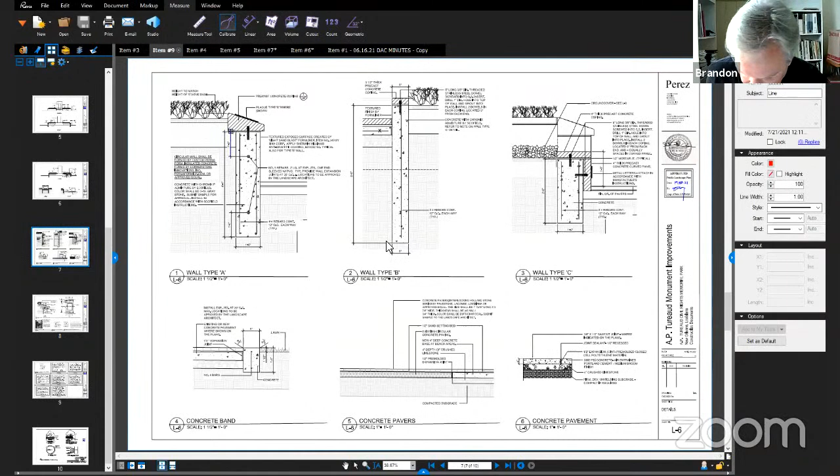There is a detail, I believe, that shows it. So if you go to sheet L7, you can see that the plaque itself is 12 by 18.

The text, I believe, is a quarter inch. It's about as small as you can get but still readable - you can't get any smaller for them to actually engrave it or put it on the plaque. In other words, there's a minimum height of the text you can get, but it's definitely readable, because I printed out a proof of it myself and stood back to look at it to make sure I could read it, since there's a lot of text to put on there.

And did you read it from a standing position, or how far away? Yeah, you read it from standing up, looking down.

The wall is probably about 3 feet high, and it's on the coping on top of that. So you're standing up and looking down at it at an angle where you're reading it. It's kind of similar to the Freedom Tower site, the World Trade Center site, where they have all the names of all the individuals, and it's a low wall that's tilted, angled, so that when you're standing there, you can read it. It's also within that ADA accessible range, so if you're actually in a chair, it's supposed to be at the right height for that as well.

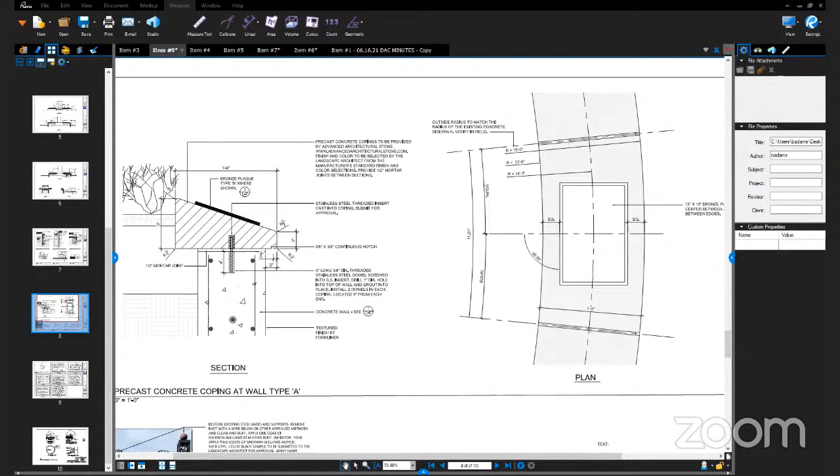To the applicant, I just wanted to say this is a very lovely design, and I really feel like it'll elevate what exists. I'm thankful that Haley had the line of inquiry I was going to pursue, because I think we're really talking about two different goals: one, the habitability and occupation of the space by residents, and two, it sounds like there's an educational component. The first one I think is being met, and I'm very excited for that.

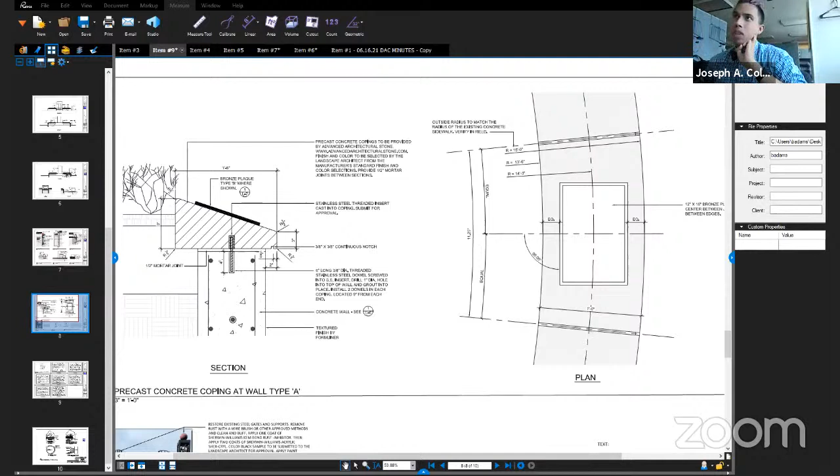But I'm worried about these plaques. If I recall from visiting the actual World Trade Center Memorial in New York, it's taller than 9 inches - I believe about thigh or waist high. My concern is that people passing by bike, car, or walking may see the statue but not know about these plaques. I'm wondering if there's some kind of vertical element that can identify that the plaques exist. These are just suggestions, whatever is feasible, but I think it would better the design if there was some kind of visual element on the actual plaque. We're talking about a wall of text, and we know from other plaques around town that are at face height that people don't even read those. So I'm wondering if there could be images of the leaders being mentioned, or some kind of vertical element fashioned in a way that's integrated into the architectural language.

But as it stands, it's fairly good.

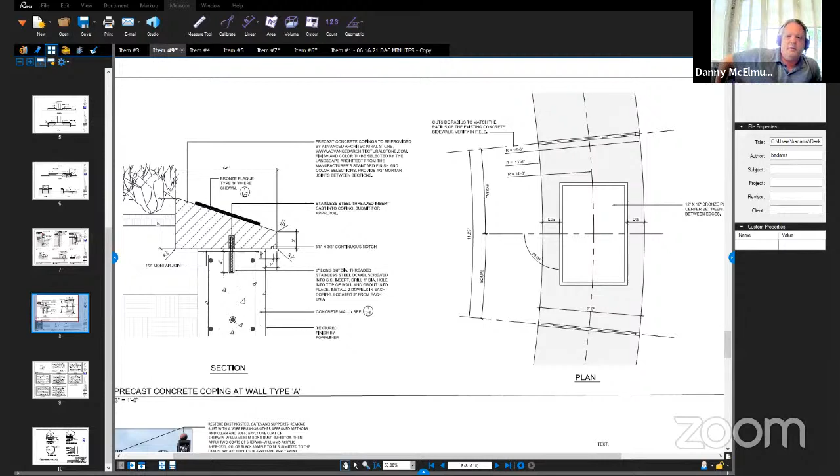I'm going to answer for Brandon on one thing: the 9 inches is just the maximum height of that angled coping that goes around. It's more the seat wall height, so it's actually up around 32 inches. It's going to be up closer to waist height for a lot of people - not for me, but for many. It's more a higher seat wall type height than what you'd think of as a low curb, so it's not on the ground. Is that what you were thinking?

There's a section, if you go back to the sheet - go to 6 or 5, one of the two. Yeah, right there, 6.5, that's right. Look at the wall type A, go that direction. Yeah, I see that, thanks for pointing that out - that was just a minor concern. My other two concerns, the wall type C issue, are more artistic concerns, which is where I'd put the weight of my comments.

It's really kind of replicating what's there now, which are broken and obviously need to be repaired, but there are panels on all 4 sides of the truncated pyramid that's the base now, where you can't even really see those until you walk up to it. That was the secondary kind of approach to it, so as they go through the space.

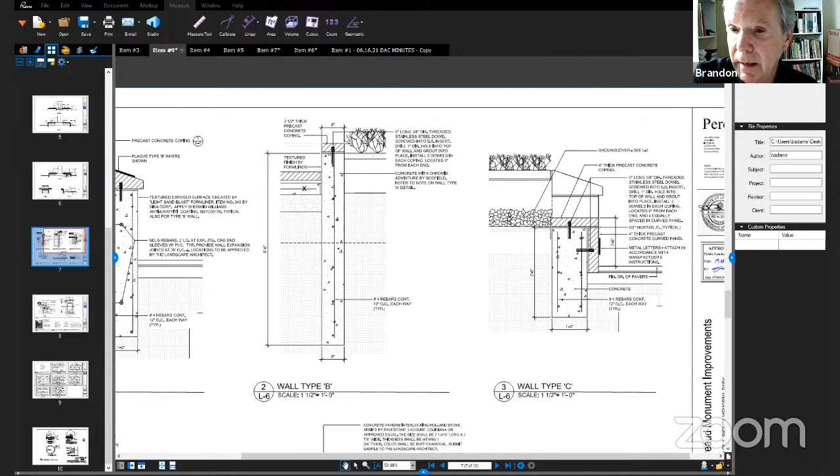I think that's where they're going to be more involved with the additional text. Also, I just want to point out, it's showing wall type C, but that's at the front. That's not where we have text right there. It's wall type A, which is to the left that you can see. You can see the height there in terms of walls, probably, I think Danny said something like 30 something inches high.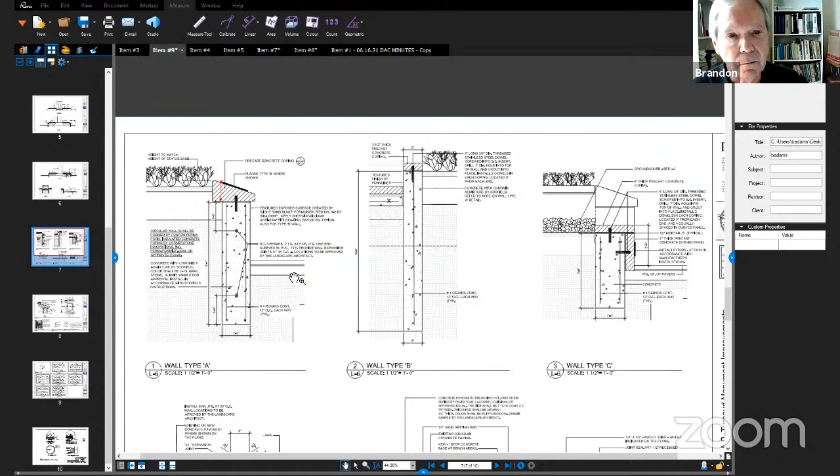I do like your idea though about, I mean, the plaques probably aren't finalized. I think the plaques, if we could include some photos on the plaques, we've done that with historic markers in other locations and it works out really well. So it may be that the plaques themselves can be changed very easily to accommodate that.

Okay, is it safe to assume there's no further comments? This concludes the presentation of dockets. The committee will now recess for 5 minutes. Consideration of dockets, including the public comment portion of the meeting, will begin at 12:25 p.m. Public comments will be accepted until the close of the 5-minute recess.

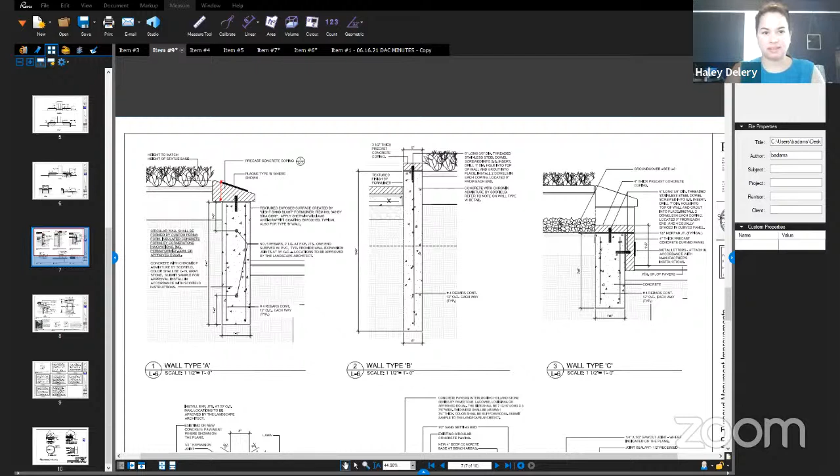The digital public comment form is now closed. We will begin with the consideration of dockets, including the public comment portion of the meeting. Joseph, did we receive any public comments? No, I just checked, none.

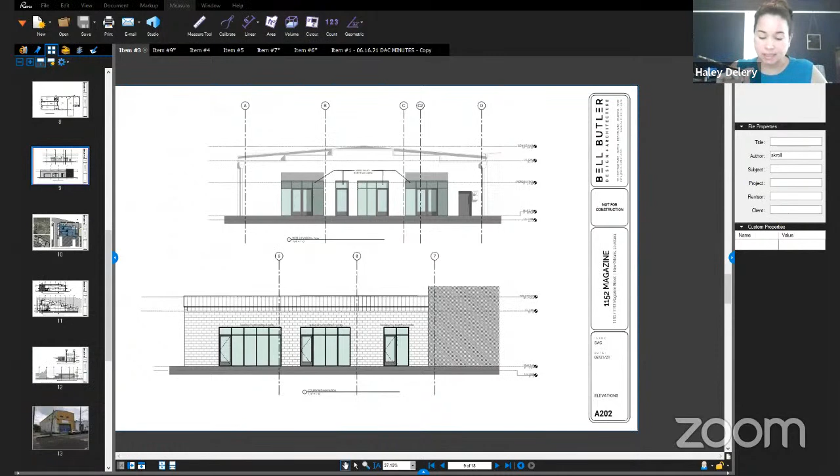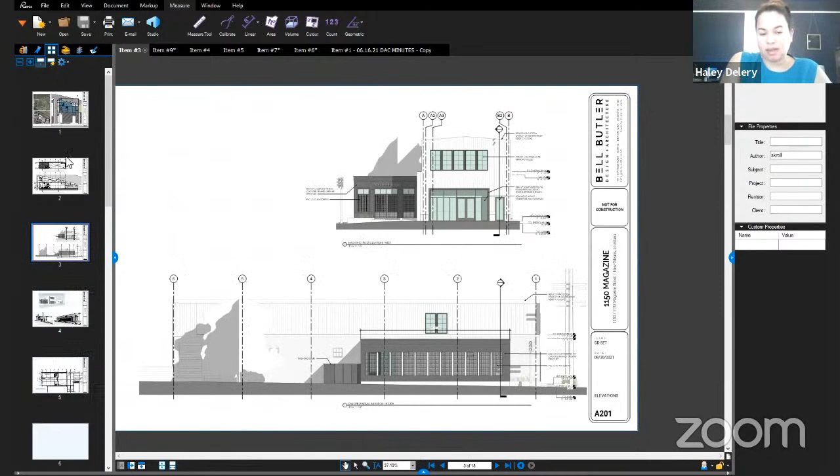Okay, thank you. So we will begin with item number 2, which was design review reconsideration. Actually, that one's withdrawn. So we'll begin with item number 3, which is zoning docket 5221 for the property at 1152 Magazine Street. As a reminder, this one project can be voted on separately. 1150 would be the proposed addition, and 1152 would be the renovation, the facade modifications to the existing warehouse facility.

1152, the renovations to the existing warehouse facility, is a zoning docket that is considered at this month's CPC meeting. So it would be preferable if we could come to a recommendation for that. And although it's preferable, it's not absolutely necessary. So we can consider them separately. So would the committee now...

Make a motion on 1150, the addition? Yes, I'll make a motion to defer on 1150 to allow the applicant time to resolve the access and site conditions as noted during the discussion. Danny, can I add a friendly amendment to include building design into that? Yes.

Okay, we have a motion by Parks and Parkways to defer part 1 of design review of zoning docket 5221, to allow the applicant time to make design changes and further explore the access and site conditions that were mentioned, and also the building design recommendations. Do we have a second? CPC Joseph will second. Okay. All in favor? Aye. Aye. All opposed? And the motion passes.

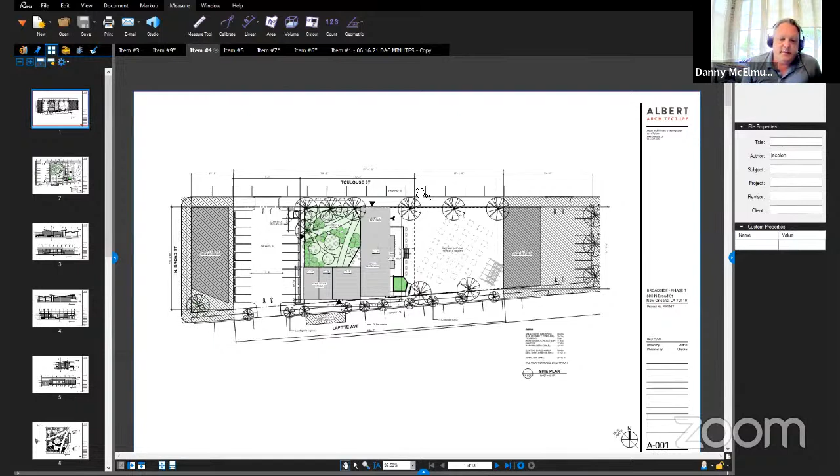I'll make a motion, with knowing that others may have additions, to approve subject to the applicant meeting the following conditions: a code compliant parking lot, street trees per 2311, landscape plan for review by Parks and Parkways, examination and determination of the driveway/parking space location for the food trucks, and the pedestrian and cyclist connections that are part of the Greenway corridor requirements to be further examined and also incorporated into the overall site design so that pedestrians and cyclists have priority.

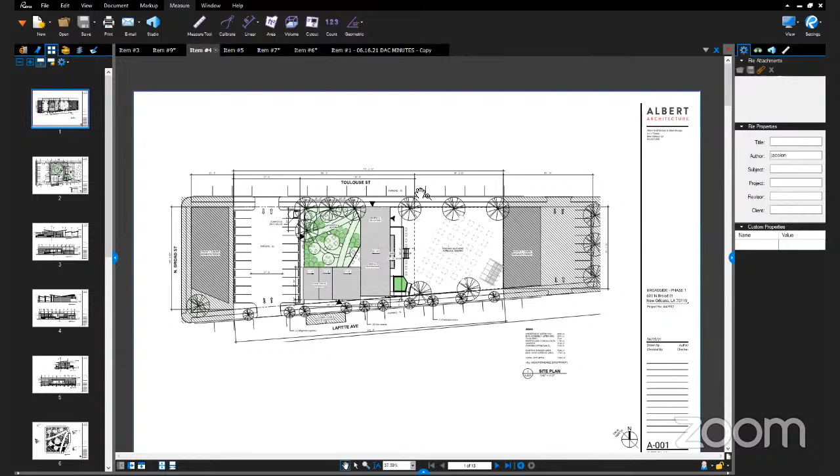As it relates to your last proviso, Danny, may I make a friendly amendment to just envelope that, in addition to the necessary site design, to put that into a traffic diagram that prioritizes pedestrian and cyclist access? And then I would add a separate proviso that ensures that vehicular parking is not the dominant visual element of the site. So accepted. Thank you. Do we have a second?

Okay, so the motion is not seconded, and so do we have an alternative motion? I'll second. Thanks, Miguel. Can you hear me now? Yes, we can hear you. It was finally fixed after all this, just in time.

Okay, so we have a motion for approval subject to those provisos stated by Parks and Parkways. We have a second by Capital Projects. I'll do a roll call vote. Haley, yay. Joseph? Begrudgingly, yay. Danny? Yay. Eleanor, absent. Miguel? Yay. Lewis? Yay. Okay, and Lindsay Gladys is absent. So, all right, that motion passes.

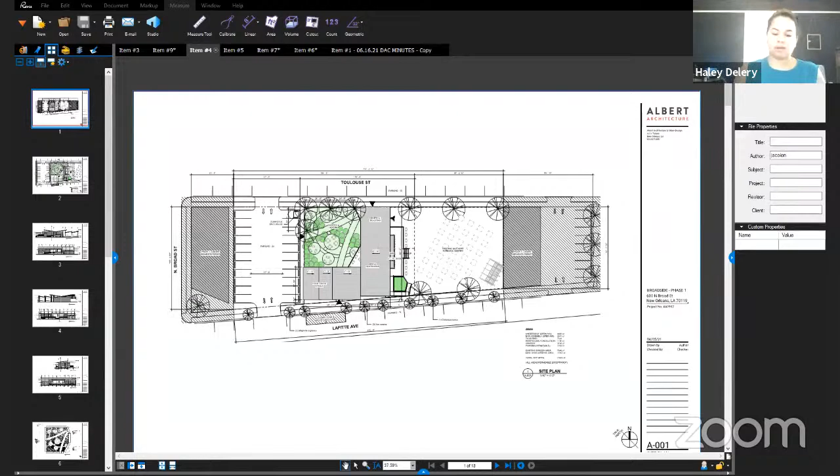We'll move on to item number 5. This was design review docket 7521, the DAC only review for the project at the Audubon Zoo. Make a motion to approve. We have a motion by Parks and Parkways. Do we have a second? CPC, second. All in favor? Aye. All opposed, and the motion passes.

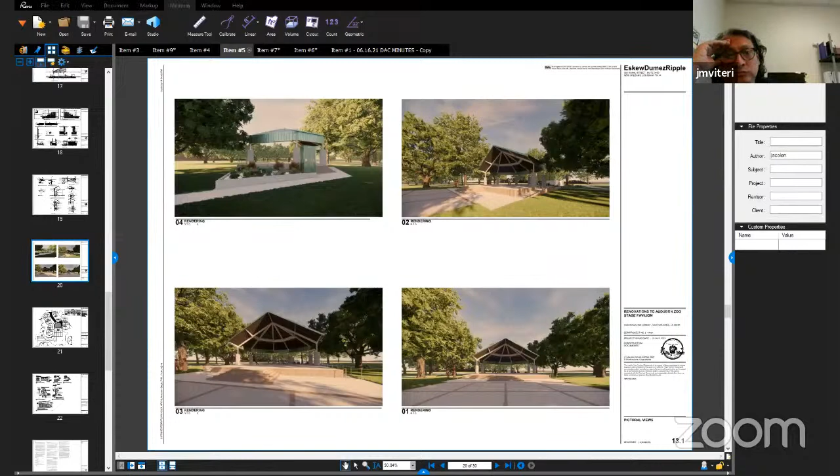Item number 6, design review 7621. This is for the Treme Center. Do we have a motion? What's the, let me ask you this, is this going for anywhere else? Does this have to go for anybody else? No, this is a DAC only review, and it's because it's a public project. Right. I make a motion to defer to allow the applicant time to either show why they can't accommodate this elsewhere

in the building, or to provide us with the elevations and renderings that will show us the actual impact of this facility in closing off the front door of the building. I was going to recommend the same, Danny, all of that. They need to provide renderings, and also CPA staff should come in and tell us why it can't be located elsewhere. So just a slight amendment to what you said, to include all of what you're requesting. It should be deferred. I would encourage, as part of my motion, that the applicant examine placing the hydraulic lift internally to avoid all of this issue.

Actually, so Danny, I recommend we defer to resubmit indicating why it needs to be at that location. They could perhaps indicate an alternate location if possible, but also they need to indicate how the elevator is going to impact the elevation of the building physically. Right, they have to come up with appropriate renderings to show what this is going to look like on the main elevation of the building, the principal elevation of the building.

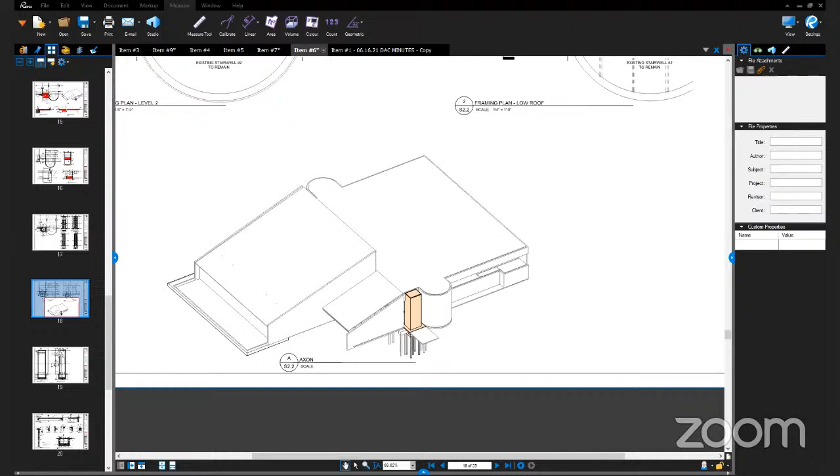I agree. And I would add the slightest of amendments to include full floor plans of both floors, so we have a better conceptual understanding of its impact on other entrances and egresses, etc. That's also acceptable. I agree. Okay.

We have a motion by Parks and Parkways to defer, to allow the applicant time to submit more detailed construction drawings that would show the impact of the elevator to the main facade, and also to provide a site diagram showing why it would not be able to be located in a different location, and also to touch upon the fact why it would not be able to be located within the interior of the structure. Do we have a second? I'll second. And we have a second by Capital Projects. All in favor? Aye. Aye. Aye. All opposed? And the motion passes.

The next item is number 7, design review docket 7721, for the shade structure at St. Andrew's Episcopal School. Make a motion to approve with the recommendation to the applicant of examining the color choices to provide a cooler experience. Do we have a second? I'll second. We have a second by Capital Projects. All in favor? Aye. All opposed? And the motion passes.

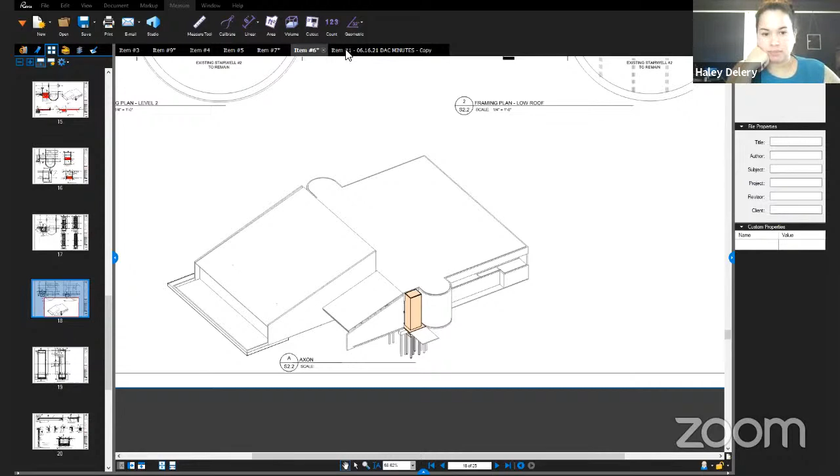Again, item number 8 was withdrawn. And the final item is item number 9 for the A.P. Tureaud Civil Rights Memorial Park. Do we have a motion? Yeah, CPC will make a motion to approve. Parkways, do you want final approval, subject to your review and approval too? Yeah, it actually requires our review and approval. It's one of our facilities, so perfect, we've actually approved it already, but because the cost went over $100,000, that's why it's coming here. Gotcha. So subject to Parks and Parkways approval and with the suggestion to ameliorate the plaques. Okay, do we have a second? I'll second. We have a second by Capital Projects. All in favor? Aye. Aye. All opposed? And the motion passes.